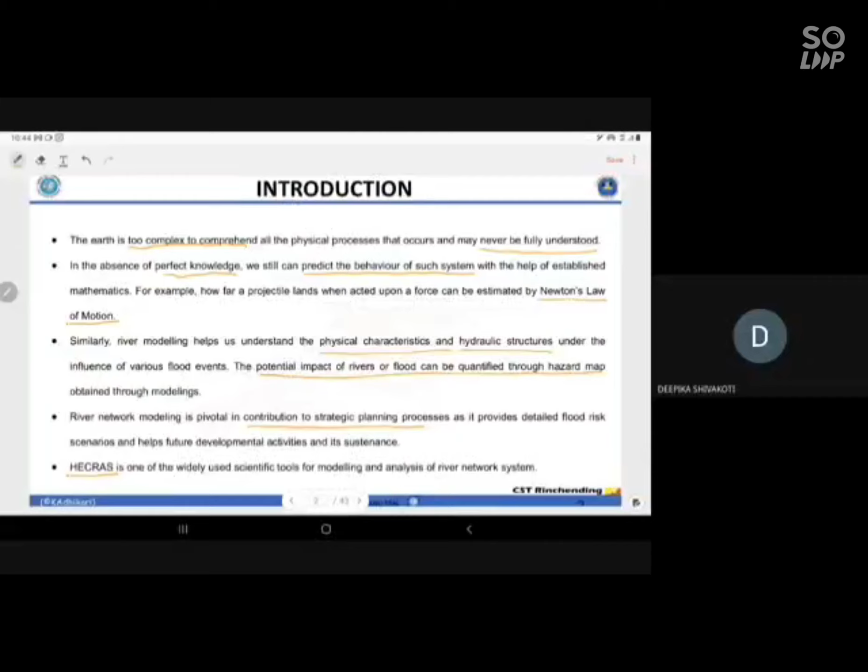Okay, so that is the basic introduction to why we do flood modeling. By the way, let me also be very clear - my presentations are intended for beginners who are just starting with modeling. Those who already have experience with HEC-RAS modeling will find this very rudimentary and basic. But I believe it is for those who are just starting, and I believe you'll have a lot to take from this presentation.

Okay, now let's understand this flood modeling much more in detail. So number one, you need to identify your study area. From the look, you can see that our world is very complex. From this small portion of Earth, I would like to say that our world is very, very complex, and to do modeling using this complex environment, complex geometry, and complex nature of topography.

It becomes slightly impossible for us to take into consideration all the factors. So what we do is we simplify things. We simplify things, because this is a three-dimensional world.

This is a three-dimensional world. Now to simplify this, we just take it as two-dimensional data. We do cross-sections, measuring exactly 90 degrees to the river, and then we take out something like this, cross sections. You can see this is a cross section.

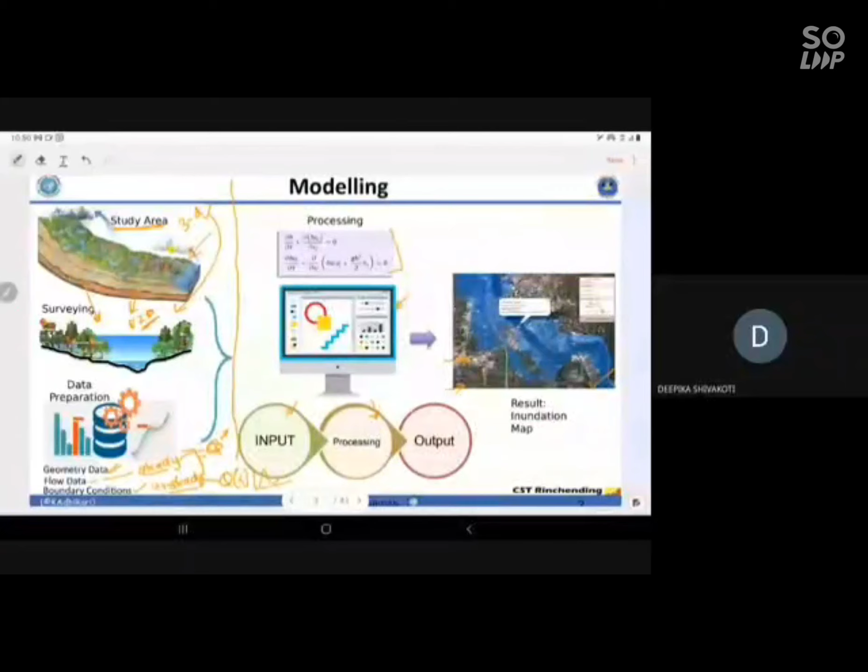Two-dimensional processing, I'll come to this point later on. The processing concept of one-dimensional and two-dimensional is slightly different. By three-dimensional and two-dimensional here, I mean that the three-dimensional Earth is simplified into two-dimensional just by taking only the cross-section at a regular interval. That is what I mean.

After that, you should have data, the flow data. The flow data can be steady data or unsteady data. If you're interested just in the surface profile, one data point, one QP or discharge data, is more than sufficient.

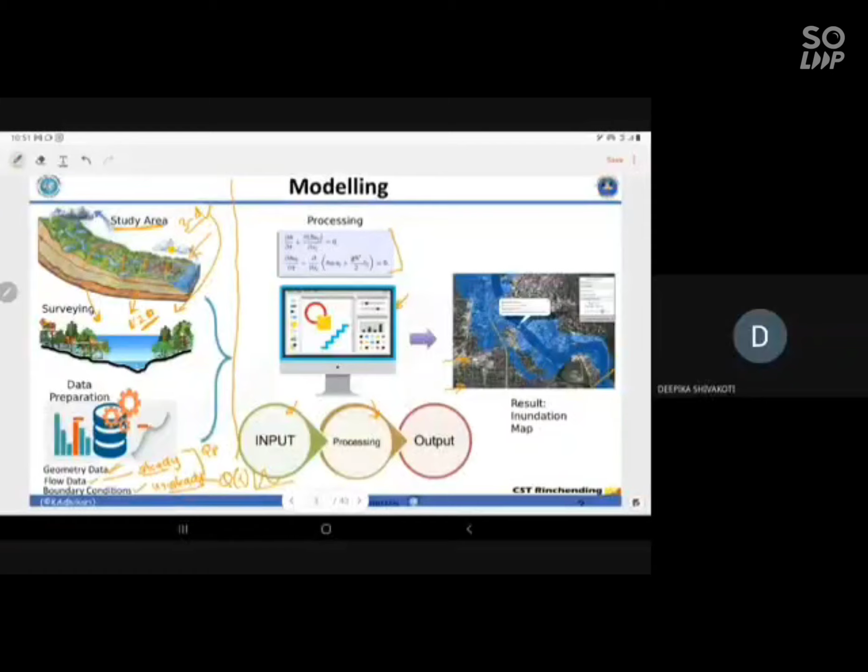If not, you should have discharge data that varies with time, which we normally call a hydrograph.

Now comes the question of why we need to do the modeling. As I already explained with this image, you can see it has already flooded. Our understanding is if, before this development happened, this river was modeled and the behavior of the system was identified, this would have never happened. That's the concept I'm saying. This could have been avoided with proper planning.

Proper planning means, before any development activity happens for any area or region, we can simply take this river, make some cross sections of it, and do a simple flood modeling. So we know that when the peak discharge Qmax, let's say X meter cube per second, is passing through, how would this area look?

Now, of course, it may not be 100% accurate, but it will give us an understanding of what the flood level would be, and how this area would behave when this flood is coming. Keeping that as a basis, we could have constructed levees or other structures that could have protected this land. So that is why we do modeling.

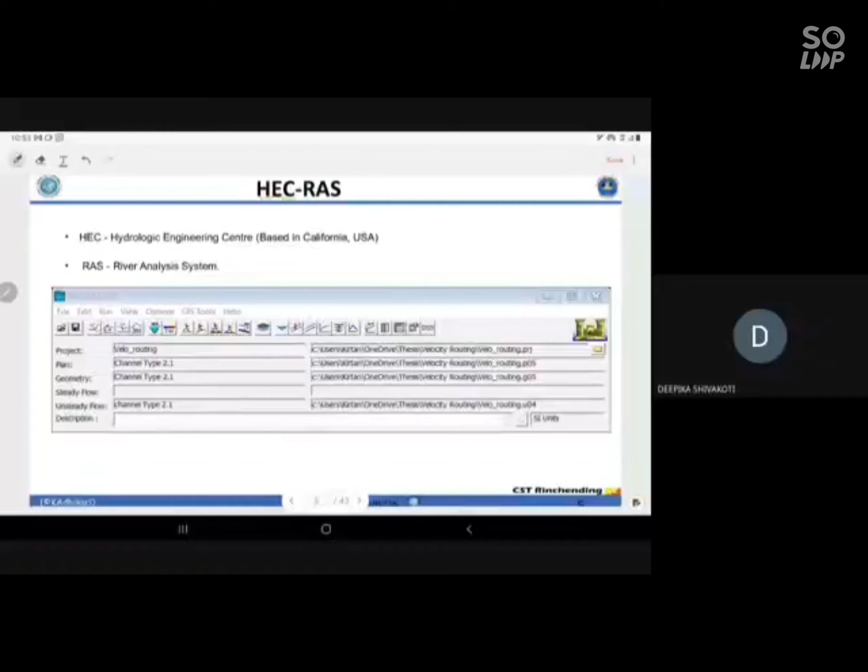So having that much understanding of HEC-RAS, let's go into the actual HEC-RAS software. When you first open HEC-RAS, you will see a window something like this. Here HEC means the Hydrologic Engineering Center, based in California, and RAS is the River Analysis System. When you open it for the first time, it's a very useful, user-friendly tool.

When you open it, a small window pops up, and there are a few options like Edit, Run, and View. These are the most important options. For most cases, you will only be using these three options.

If you need to put geometry data, you just click on the geometry editor and start putting your geometry data. First you create a project, and the plan means that for one particular geometry, you can run a number of situations. For the same case, let's take this case.

Once you have the geometry and want to supply the boundary condition X as X meter cube per second, you run with X meter cube per second. If you're not satisfied, you run again with X plus 1 meter cube per second. So you can simulate a number of times.

For that reason, there is a plan. Plan means what situation you are running. If you're running a different setup, you can name a plan. With the same geometry and the same boundary condition, but by changing the inflow characteristics, you can run a number of times.

So once you have set up your HEC-RAS model, once your geometry is fixed, and once all the other stuff is fixed, you can run the same model a number of times for different situations. So that is what plan means.

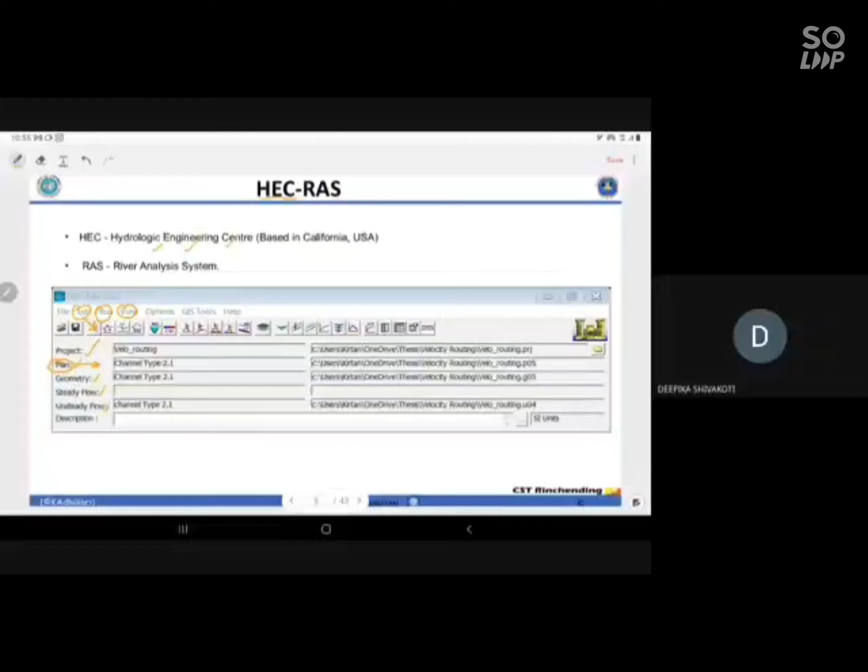Geometry is, like I said, the geometry of the entire cross section or the entire reach. There are two options—either you can run for steady flow or unsteady flow. It's very straightforward, not cumbersome at all. Anybody starting with HEC-RAS can get along with it in a very short period of time.

So let's talk about the input data now. The most important data is the geometric data—this means the entire river system and the cross sections. One convention HEC-RAS uses is: if the river is flowing in this direction, you stand here and look toward the flowing direction. Your right hand side is the right bank, and your left hand side is the left bank.

Okay, so let's say this is the river center line. So this is your right of bank and this is your left of bank. This is the sign convention for HEC-RAS. So while you put the data, you have to make sure that the Mannings coefficient for left hand side and for right hand side, you put it differently.

There's a flexibility to give different Mannings for different reach lengths. Now if I just make a cross section here, let's say this is a cross section and this is your floodplain. Here the Mannings would be different than the Mannings here. So HEC-RAS also gives a facility to give different Mannings values at different regions.

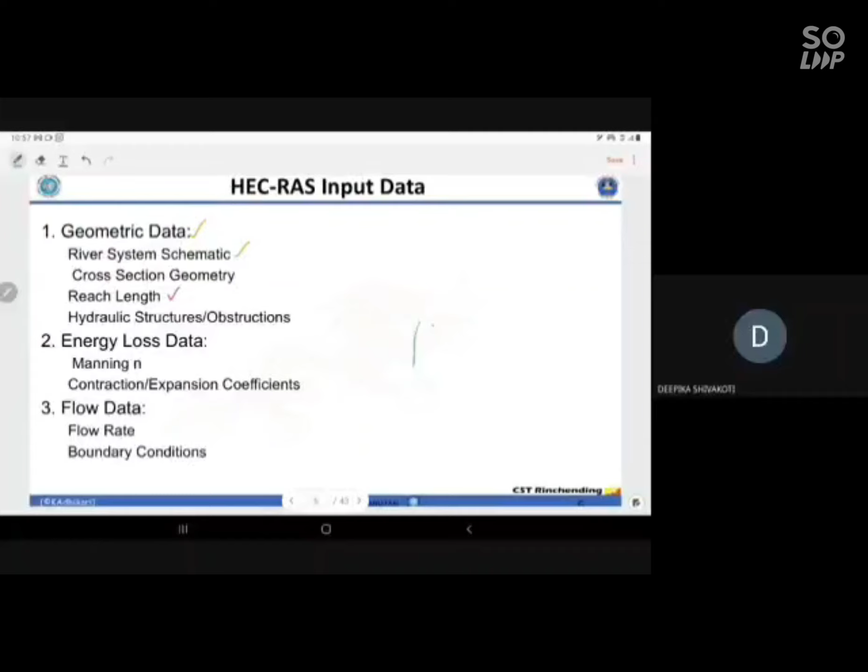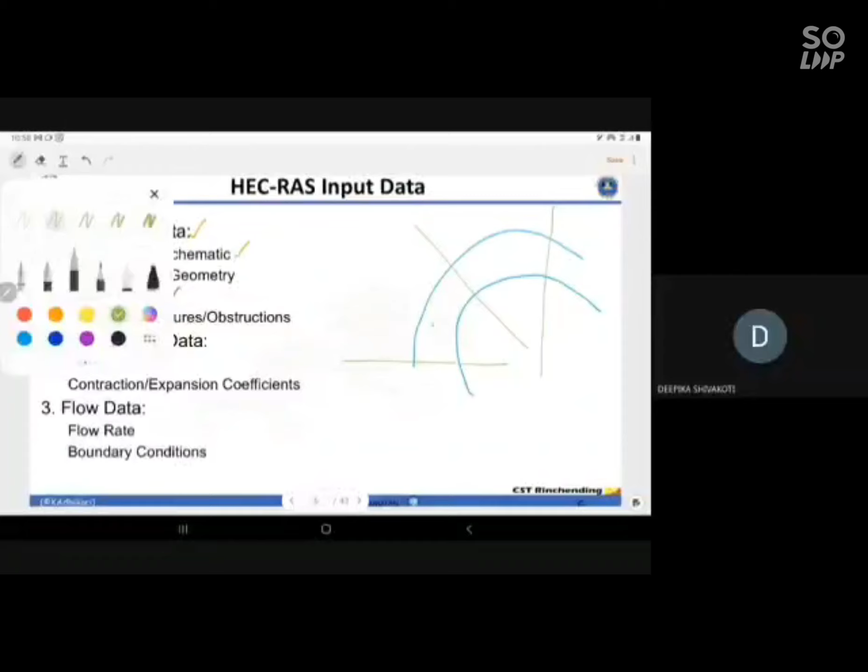Let me use a different pen here. If your river is going something like this and your cross sections are like this, it has to be perpendicular to the flow. So you see the reach length here, for the same reach, the reach length at this side is small. So for this reason, the reach length has to be different.

HEC-RAS gives you a flexibility to provide different reach length, because when the river is curving, the reach length is different. So HEC-RAS gives you a facility to provide different reach length at different locations. For the same reach, the reach length at the left of bank and the right of bank would be different. So that's why HEC-RAS also gives you a facility to provide different reach length at the same reach.

Next is the hydraulic structures. So hydraulic structures like levee, dam, barrage, weirs. HEC-RAS also provides you an option to provide this information.

And the most important parameter is the Mannings Roughness coefficient. This is a very important parameter, but at times we try to be ignorant about this parameter. It's one of the most important, in fact. One thing is we rely completely on standards available to us through some kind of standard textbook, right? But many researchers have claimed that the Mannings behaves kind of differently.

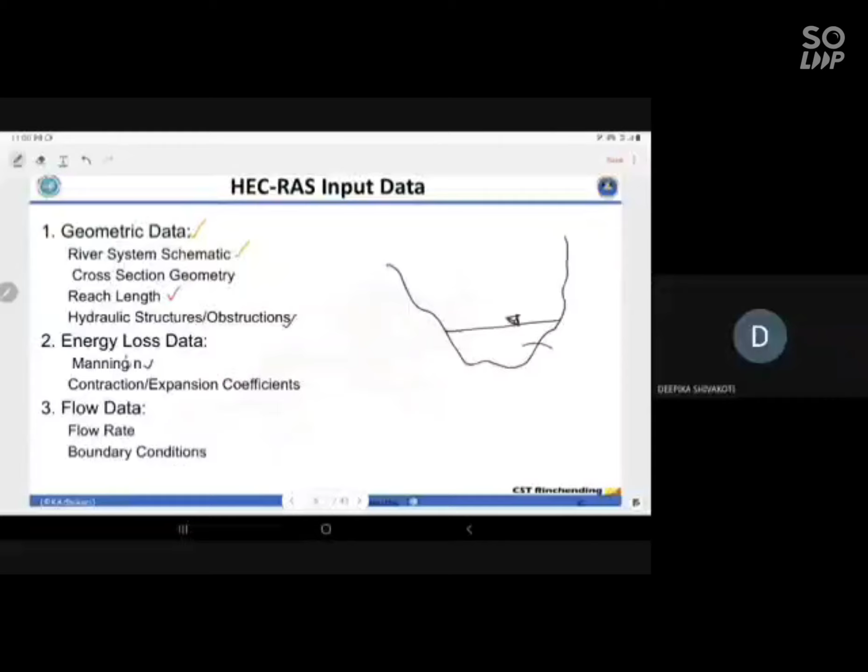Just as an example, recently I was working on this. If your cross section is like this, and for, let's say, the water depth is here, the Manning here would be something different. Let's say Manning 1. As the water level increases, the equivalent Manning, that's what we call it, at this level would be something else. In the same river cross section, Manning varies.

Manning varies in X, in Y, and in Z, and also it varies in T, in time, because you must have observed that during summer there is lots of vegetation. During winter, that vegetation won't be there, right? So this Manning is something very important.

So I highly recommend not simply plugging in the value through some standards, but to do your own research, and research in the sense you just go to the field and try to verify the Mannings. Very important, at times ignored in most cases, but it's very, very important. The Mannings given in standards may not apply.

But one limitation of HEC-RAS is Manning can vary along X and along Y, but you cannot vary along Z and T. So this is one limitation in HEC-RAS when you do the simulation. When I say Manning varies in Z, what I mean is the Manning that varies with respect to the depth of water. Maybe in future they are going to incorporate that, I don't know, but this is one limitation.

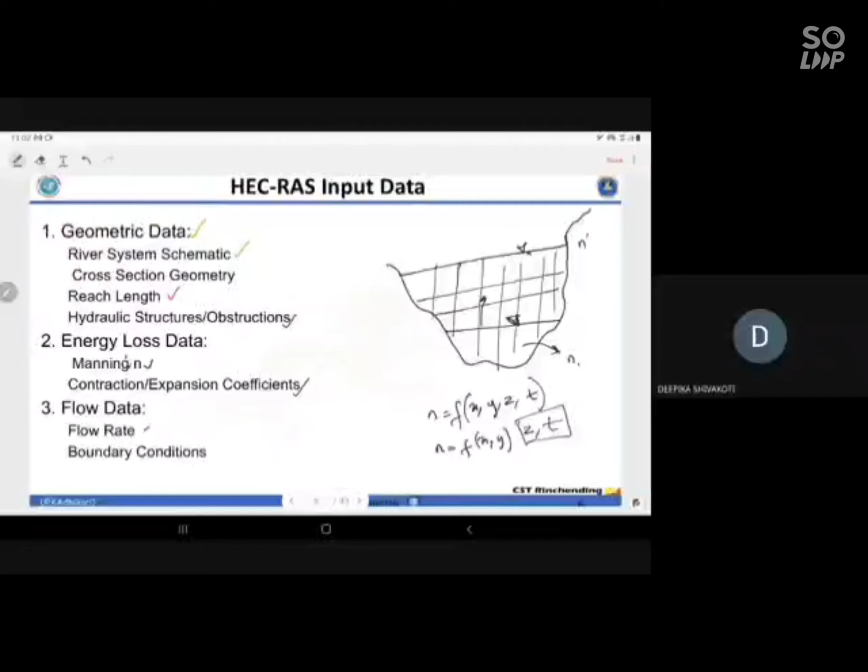You can either put one discharge value or you can put a complete hydrograph. If you put one discharge value, the scheme that HEC-RAS uses to solve the problem is different. It uses the energy equation. If you put unsteady discharge, like a hydrograph, as a boundary condition, then it is going to use the Saint-Venant equation to solve the problem. So as a researcher, you may have to decide what you are interested in - either the surface profile, or the interaction of flood with the hydraulic structures.

Okay, so let's go one by one. When I talk about the geometric data, which I have already explained, take a small, dendritic system of the catchment, wherever you are interested to model. So for instance, if you're interested to model between A and B, of course you can model the entire reach, but you need a very strong computer to process all this. Moreover, you need data sets, and this data set limitation can impose a constraint on doing the entire catchment study. So for that reason, we just take a small study area of length L, let's say A and B. Now, the same thing is done in HEC-RAS in this fashion.

Now, you may think this comes up time and again - whenever I give this lecture, the one thing students always ask is, sir, your river is meandering, but when you draw it in HEC-RAS, why are you drawing it straight? That question is always there. My students always ask this. So I know some of you doing this for the first time may have the same doubt.

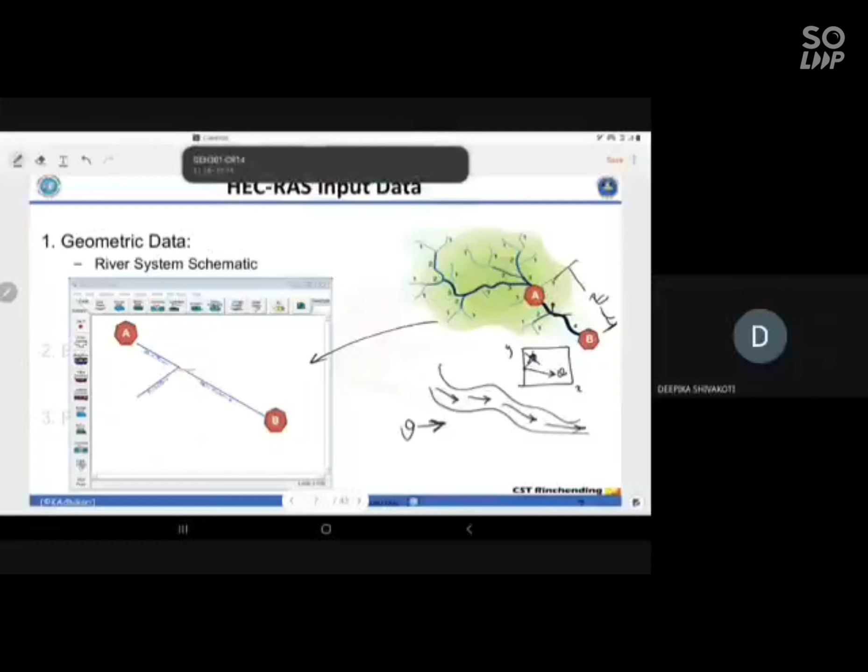The reason is it does not matter to HEC-RAS, because we are using one-dimensional flow, one-dimensional equations to solve our problem. In one-dimensional equations, we consider the velocity component only in the forward direction, so it does not matter here. The only difference is that the velocity component has an X direction, and if we take this as an XY plane, the velocity will have a component here too. But because we are using one-dimensional analysis, HEC-RAS will ignore that and only take the component in the flow direction, not the other direction along the flow. So HEC-RAS ignores all other components and only takes this velocity component. That's why it doesn't really matter whether you draw the river in a zigzag fashion or as a straight line - it's all the same.

The only difference you can provide is through the help of a reach length. If your river is meandering, and you know at which section it is meandering, from your data you will have L and L-dash with different values, because whenever there is meandering, one side will be less and another side will be more. That is the only information you can put in HEC-RAS. Otherwise, when you construct the geometry, you have to construct this yourself in one-dimensional flow. So when you construct it, you can simply click one point, click another point, and it will make a river - that is a hypothetical river. Now you need to provide the cross-section information.

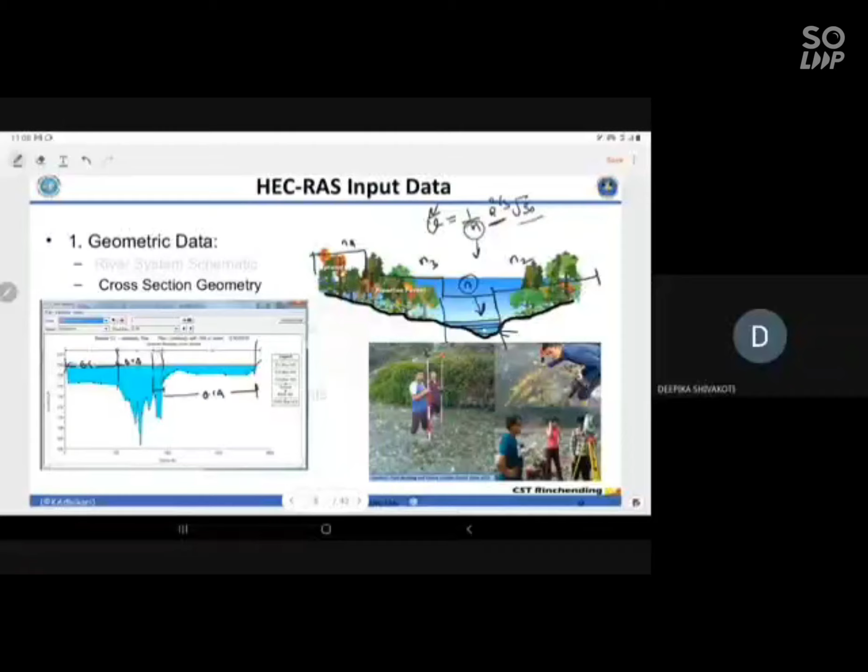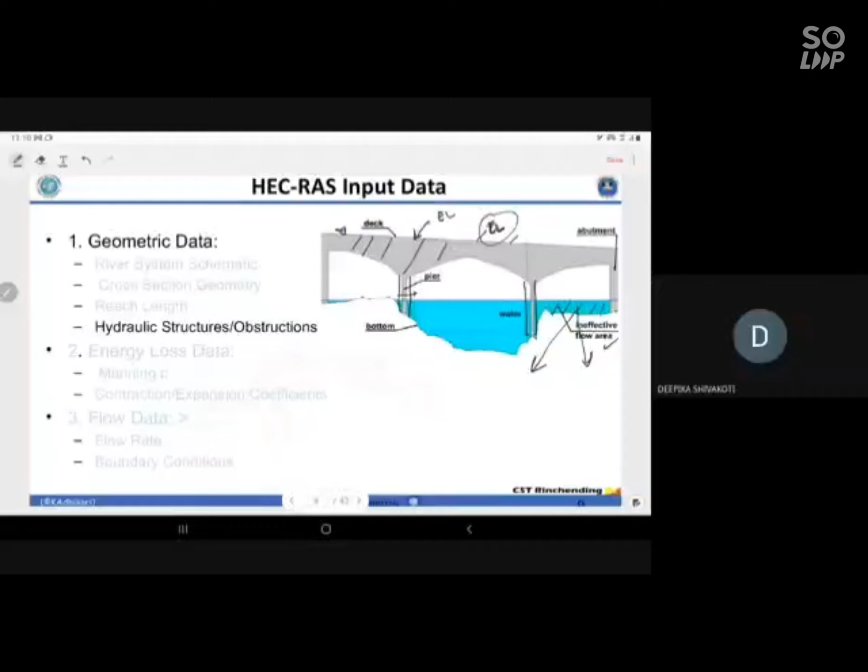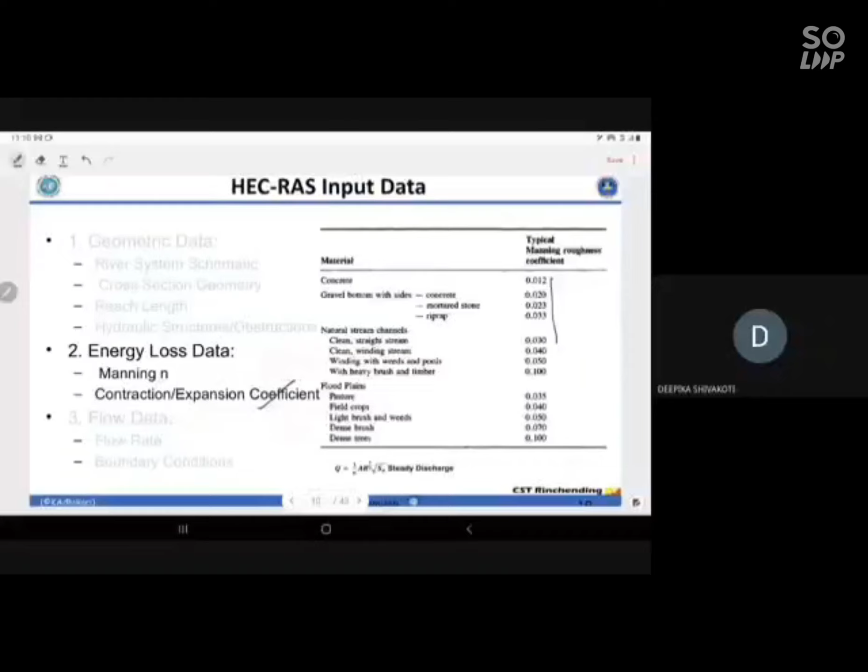I have already discussed the Manning's roughness coefficient, so let me not go in depth here, because as I said, it would be wise to go to the field and take the values yourself rather than simply relying on standard values. There's also another concept of contraction and expansion coefficients. By default, HEC-RAS gives these, but you can also change them if you want.

Finally, the flow data - the most important thing. As I already explained, you can provide one discharge value, just one Q, or you can provide a discharge with respect to time in the form of a hydrograph.

You can also provide a stage hydrograph. If you are coming from pure academics, you may not have this experience, but if you come from the field, you will understand that at the riverside, people don't measure discharge directly - they only estimate it. What they measure is the depth of flow, and once they have the depth of flow, they establish something known as a rating curve. From the rating curve, they estimate discharge.

So this discharge data is in fact coming from the rating curve. Now at times, if you don't have the rating curve but only have the stage hydrograph, you can also provide that as the boundary condition. It is not necessary that you provide discharge - you can also provide the stage hydrograph as the boundary condition. HEC-RAS has the ability to take in either a discharge hydrograph or a stage hydrograph.

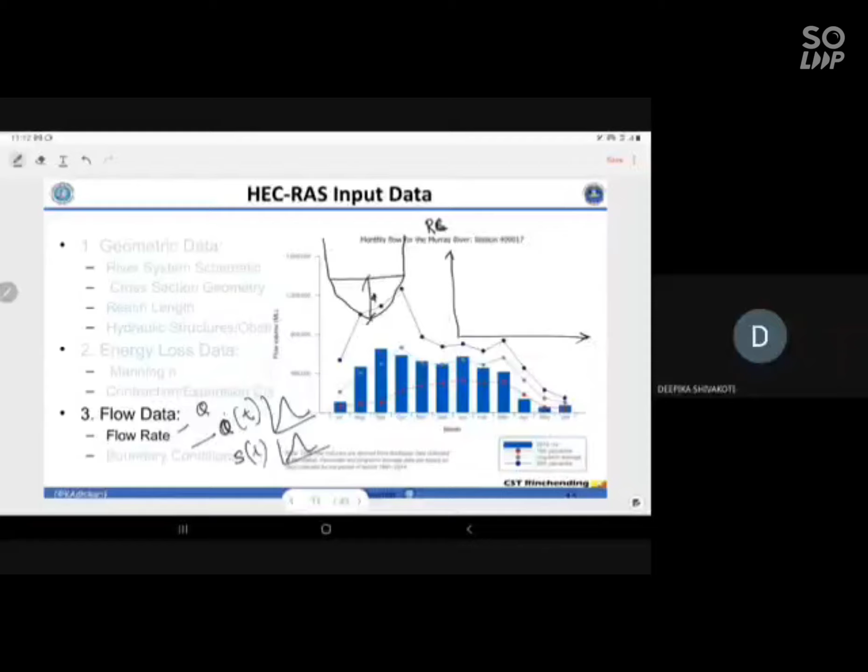Finally, we come to our boundary conditions. As I mentioned, there are two boundary conditions: one at point A and one at point B. If you forget about the tributary, there are only two boundary conditions: the upstream and the downstream boundary condition. But if there is a tributary, the inflow hydrograph also has to be provided, so that adds another boundary condition. If another river tributary comes in, you also need to provide a discharge at that point, which also acts as a boundary condition.

For this example, I have the upstream boundary condition at point A, a downstream boundary condition at point B, and since this image is cropped from the bottom, there should be one more boundary condition at point C. Otherwise, the program is not going to run.

At point A, which is the upstream boundary, I'm putting the flow hydrograph as the boundary condition. You have the option to put a stage hydrograph, flow or stage hydrograph, or a rating curve, and there are many other options. These other options are not for the channel itself, but for hydraulic structures.

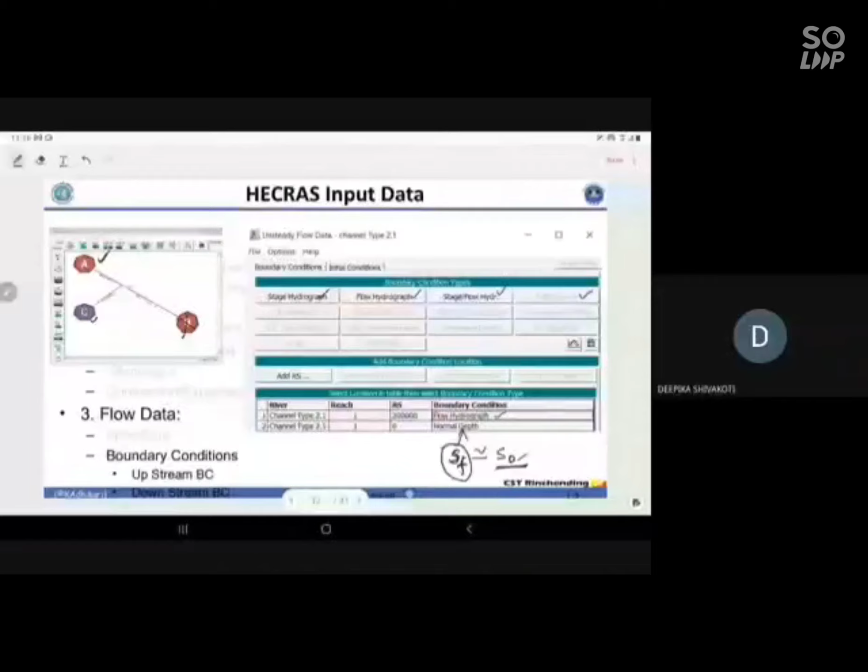So the best way to deal with this situation is to simply put S0, with the understanding that slight errors can be expected at the downstream boundary. But if you have a hydraulic structure downstream where you are certain that the flow at B is critical, then you can put critical depth as the boundary condition, and it will be fine.

Now comes the processing part. HEC-RAS has steady flow analysis, which is one-dimensional. It also has unsteady flow analysis, which is one-dimensional, and it also supports two-dimensional modeling. In today's lecture, I will be discussing steady flow analysis and one-dimensional unsteady flow. Although I have included two-dimensional flow as an example, the hydraulics of two-dimensional modeling is off the scope of this lecture, so I will not be discussing 2D hydraulics, but I will show you the results from a 2D simulation.

HEC-RAS also supports sediment transport. As a matter of fact, I have never used the sediment transport feature myself, so I will not be an expert to deliver a lecture on this, but it has the capacity to do sediment transport. Recently, they have also included debris flows and non-Newtonian flows.

I have not experimented with this very new feature in HEC-RAS 6.1. In this version, they have included debris flows, which is non-Newtonian flow.

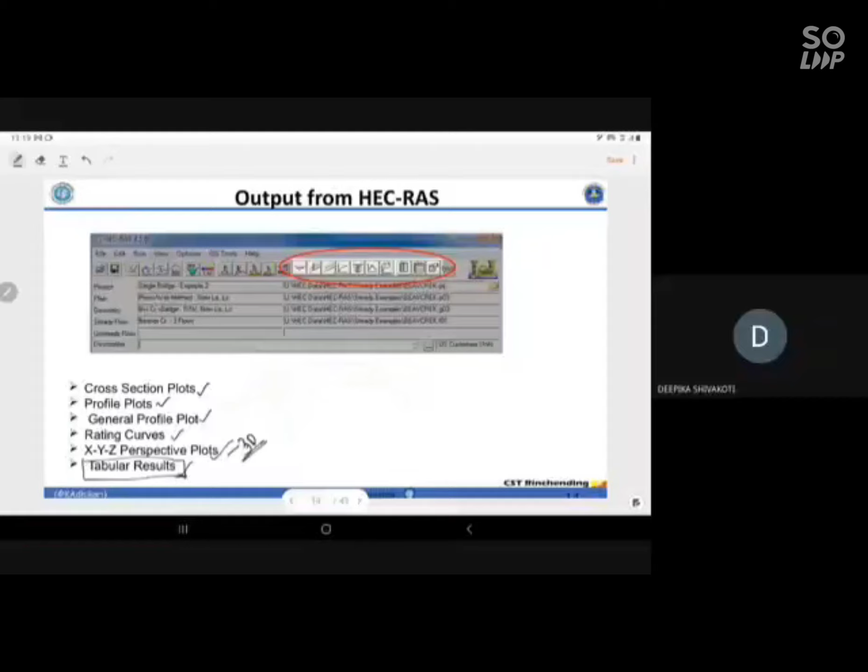If you are an engineer, then you will mostly be dealing with this tabular result. Other things are just to show, just to present, but this is more important for hydraulic engineers. So let's see what it is.

The first one is the cross-section plot. You can see this is the steady flow case. For a steady flow case, at a particular river cross-section, at that particular discharge, the water level is at this height. So it's a simple thing, just for presentation only - there is no more information available here. HEC-RAS gives you this information.

Next one is the profile plot. This is useful - you can see the backwater curves and other important aspects. If you're doing a channel design and you're not sure, because of the construction of bridges you have to constrict your channel, you want to do the analysis to see what would be the backwater curve.

So that time it becomes very useful to see how the backwater curve behaves. So profile plot is - your river is here like this, this cross section. Let me put it as profile, PP. So this cross section you are visualizing in HEC-RAS. You can see here there's some kind of dam, and from here you can see the water profile. So HEC-RAS has all these capabilities.

But as such, for my experience, this is only for visualization purpose. Mostly, if you're interested to do any further analysis, then you have to go into the tabular values, because that will give you more important information like frictional slope, the number of iterations, and the error. That is also important. Sometimes what HEC-RAS does is it's an iterative process - it uses iteration to solve the energy equation.

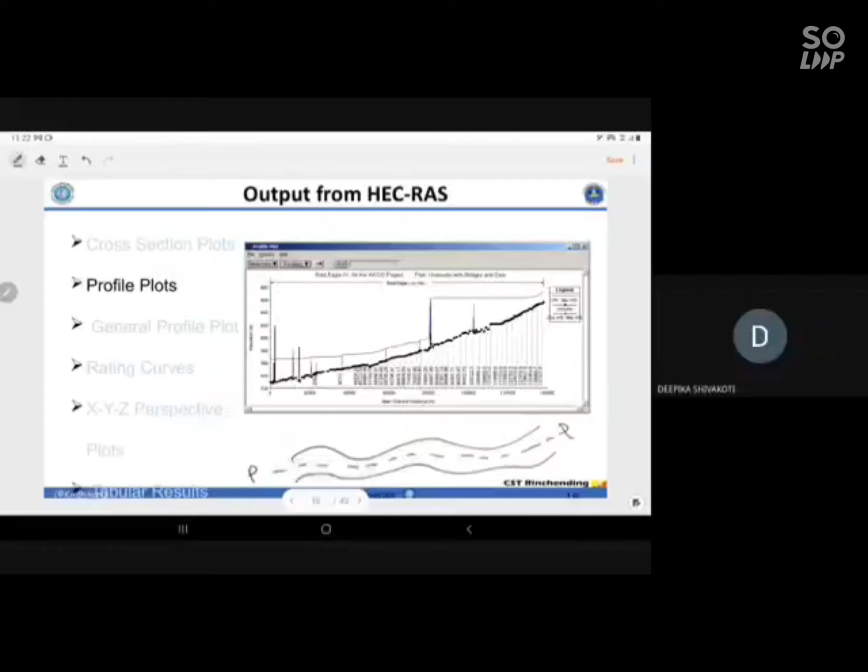And when it reaches about 20-30 iterations - I forgot the exact number, I feel it is 20 - when it strikes the 20th iteration and yet it could not converge towards the answer, then it will simply take that as a value, and HEC-RAS will give that as a warning or an error. Sometimes that happens.

So finally, HEC-RAS also gives a rating curve at a particular cross section. Now, why I'm showing this is important - from the rating curve, you can analyze whether your model was stable or not.

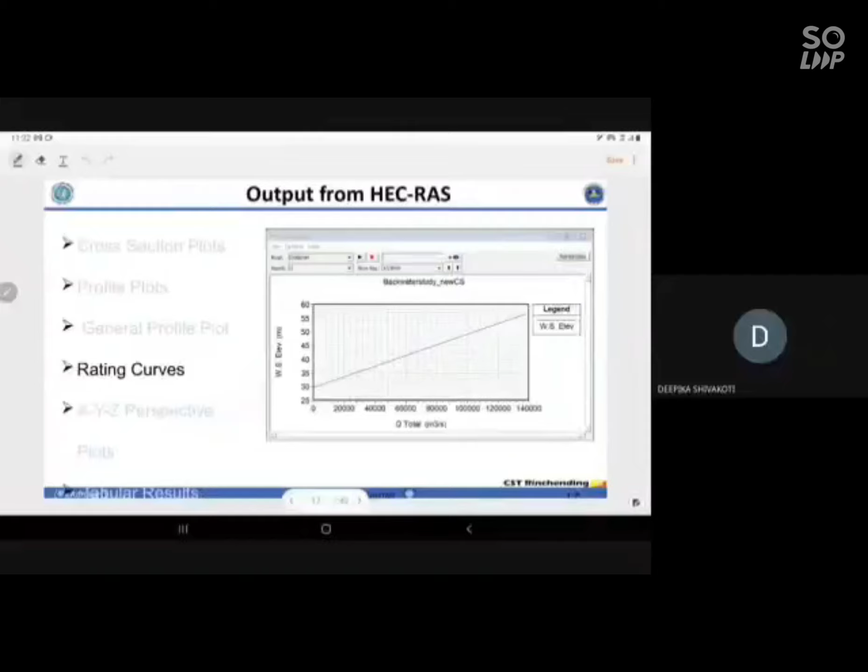Sometimes what happens is your HEC-RAS will run, it will simply run, it will give you a result, and you will be very happy. But when we analyze this rating curve, you will feel that it has gone something like this. So from here only you can make sense that although HEC-RAS did not indicate any issues, you need to understand that there was some kind of instability in the program. You may have to change some parameters in your geometry or your flow data, and then simulate the cases again. I have observed this a number of times.

HEC-RAS is running absolutely fine, but when I check the rating curve, it gives something like this. So from here you can make sense that it was not correct. Maybe it is because it has reached the 20th iteration, it could not converge, and then it took the same value.

Because of that, the error was persistent in the rating curve. So this is one way to analyze whether your program is actually working fine or not. If in unsteady case there are some issues, then the solution will blow off, meaning your program is becoming unstable. So the rating curve is one case where you can visually see whether the program has run fine or not. My first thing after doing a simulation is to go and directly check the rating curve. If it's coming fine, then of course I can rely on the data.

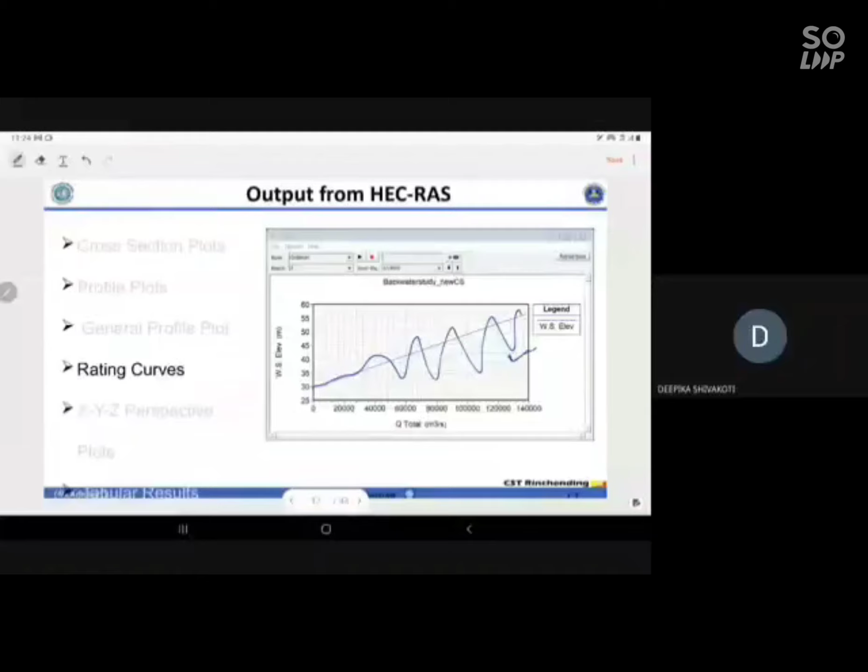If HEC-RAS is not giving any issues, yet the rating curve is fluctuating like this, then I need to once again check my input dataset. This is very important, something I have learned with experience. And finally, not very pleasing, right?

And the last and final one is the tabular plot. This is where most engineers would be investing their time. So after running - this is for a steady case - taken from the Godavari Sabari reach. We were also doing some steady analysis there, just one-dimensional analysis. So at that time I took out this tabular form of the results.

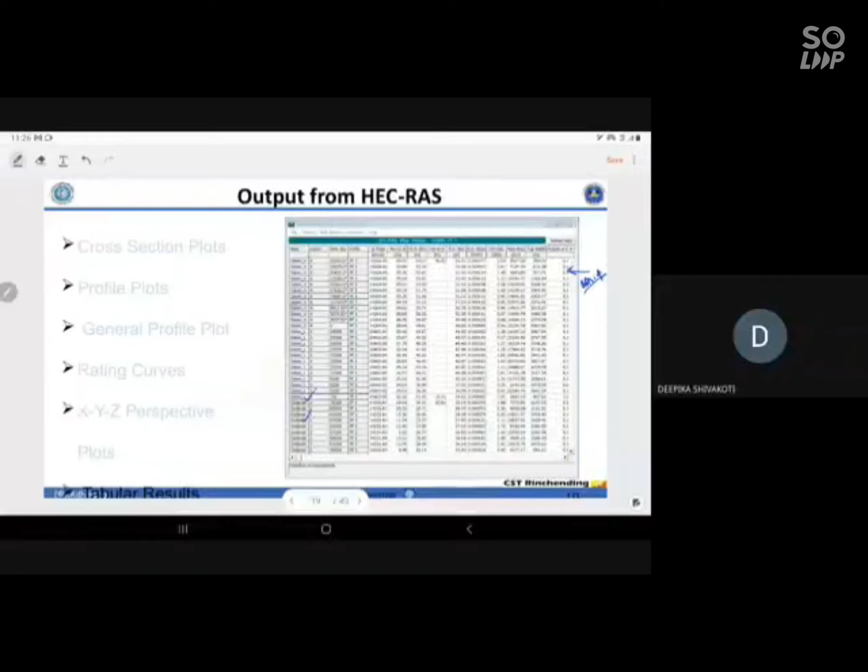HEC-RAS also gives us the flexibility to solve in the mixed mode. Mixed mode means it handles both supercritical and subcritical flow - we know there are two types, right? So mixed mode means when you're doing a simulation, it also handles the Froude number fluctuating below 1 and above 1. So there's a chance of Froude number going very high and very low in the same case. For that, if you anticipate such cases, then you can run for mixed mode.

So to summarize everything, HEC-RAS has 3 steps: input, processing, and output. In input, there are again 3 cases. First, you put the geometry data, then the boundary condition and the flow data. These are, and also the Manning's roughness - the roughness. So there are 3 input parameters.

Then you choose processing - now we have steady, 1D steady, 1D unsteady, and 2D unsteady cases. So you choose what you want to solve for. And finally, output - you can visualize the cross sections, the profile, the rating curve, and also the errors.

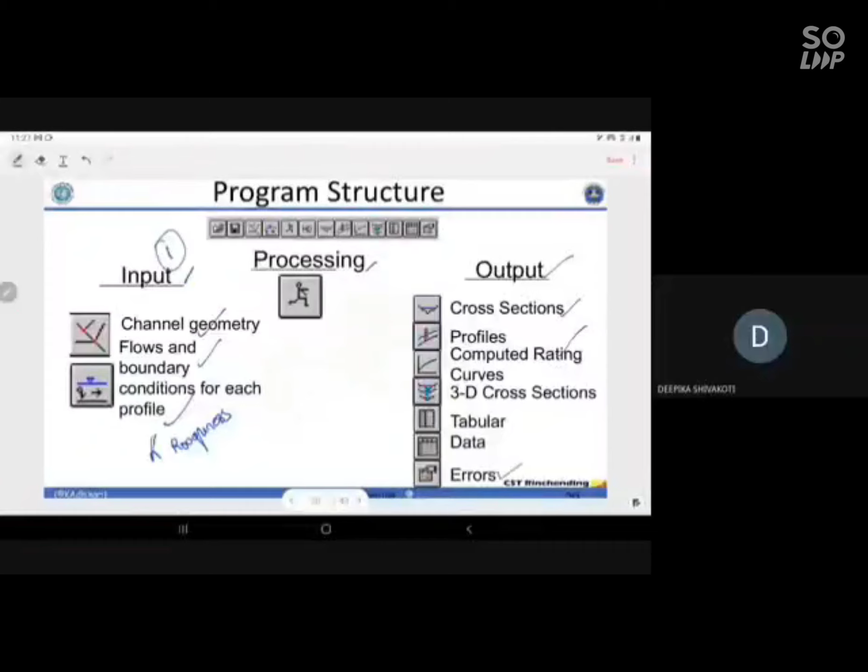For engineers, I believe the errors and the tabular data are much more important for us than the 3D cross sections. The profile, the perspective plots - that is only for presentation purposes, not very useful. But for engineers, the tabular data and errors are definitely very useful. And also the rating curve.

The rating curve check is not a standard process, but I usually check it. If it is stable, I understand the program went well. If it is not, then we need to understand that there was some problem in the simulation.

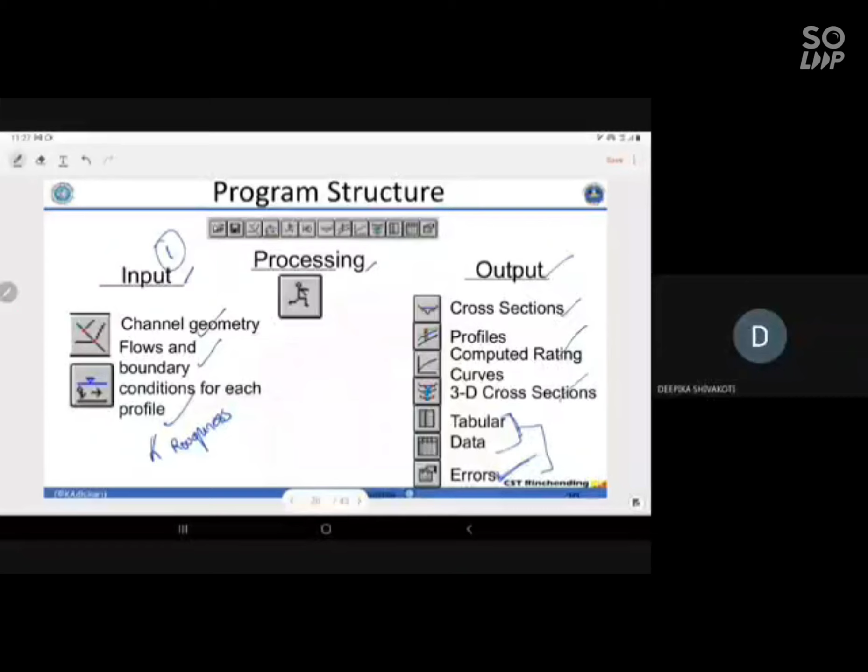So finally, to summarize everything, what did we just accomplish? We did modeling - so what exactly is modeling? Our physical world that we live in is very complex. We can simplify it by ignoring factors that are insignificant in the study.

For instance, when we put river discharge there are so many other aspects, because the density of water is not exactly 1,000 - when it's flood water, the density of flood water is not 1,000. Yet we put 1,000. These are some of the assumptions we make. Moreover, there will be evaporation, there will be infiltration.

We did not take this into consideration because it is insignificant when compared to the peak discharge. The value is very insignificant, so we simply simplify things by not considering other factors. By simplifying the system, it enables us to predict the behavior with the help of established mathematics.

In open channel flow, the mathematics is the Saint-Venant equation. There are two equations: one is the continuity equation, and one is the momentum equation. Here I have given you both forms of the momentum equation. One is in conservative form, another is non-conservative form. Non-conservative form means the variable here is in terms of depth and velocity.

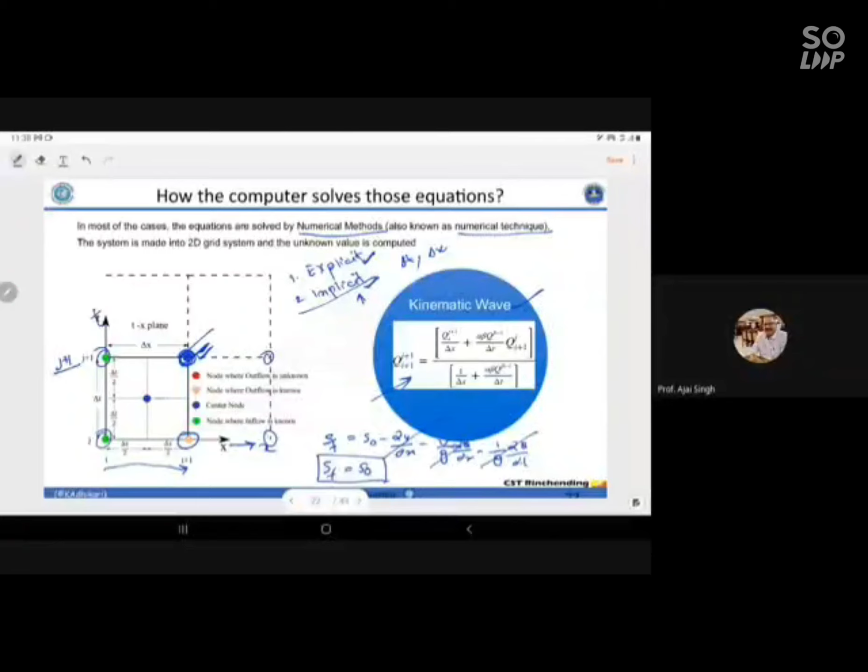Kinematic wave is fairly suitable in my case because it's a mountainous terrain, and the wave behaves much more in a kinematic fashion than in a dynamic fashion. So for the Indian case, kinematic is absolutely not to be used. That's some extra knowledge, nothing to do with HEC-RAS anyway, just extra knowledge.

All right, so finally we say we solve these equations, but how exactly is this equation solved? So just in case, for those of us who have forgotten the basics of calculus - moreover my slides are for students, so you can skip this if you're already aware of it.

So what we do is we find the derivative terms from the basic definition of derivative, that is the slope. Just as an example, let's take the function value of x squared, and we want to estimate the slope, keeping the x grid as the distance of the small change, delta x, as 0.2. From this equation we get to know that the derivative of this function at the value of 3 is 6.2.

Analytically, if we solve it, we know that the derivative of x squared is 2x. By this, we get the function value 6. So we know now there is some issue here, right? In numerical technique, this issue is what we call truncation error. If you subtract the actual value minus this value, there is some overestimation.

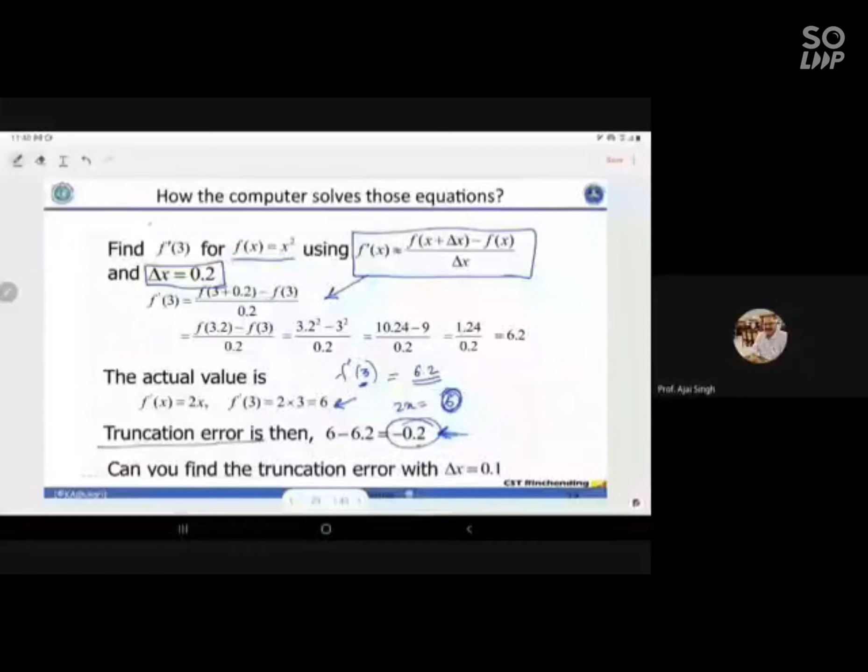This could be a reason, I cannot tell for sure, but yes, when we are doing so many approximations, such errors are persistent in the model. This is not just true for HEC-RAS, it is true for any numerical technique. To reduce this, people have used different forms of schemes to solve the equation numerically. So finally, here comes the most important thing: how reliable are these models?

I see some errors in previous examples, so there are some errors, right? So that is what I was referring to.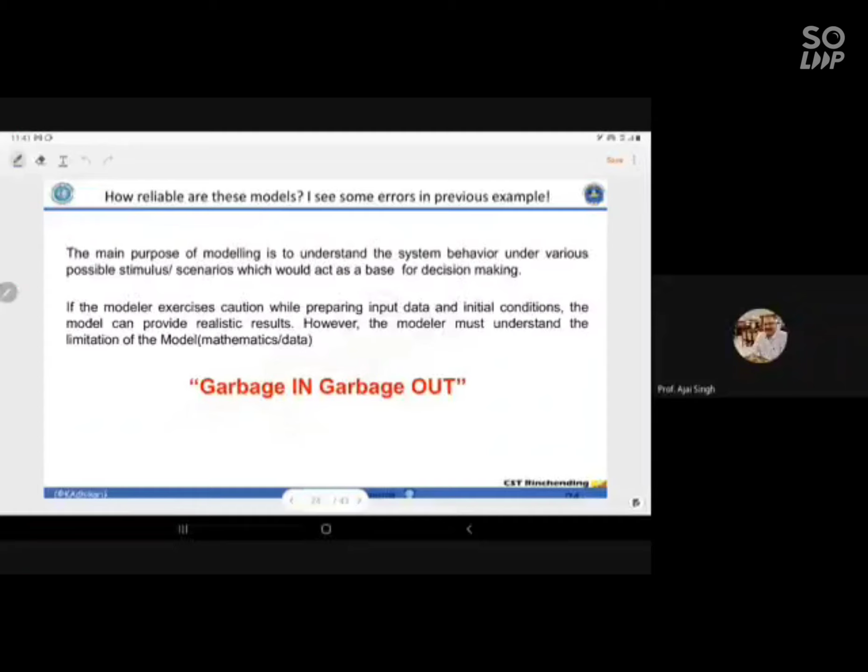The purpose of modeling is to understand the system behavior under various possible stimulus that would help for decision making. That is the main fundamental idea behind all this modeling. We don't want to exactly find the solution, but it should give us something based on which we can plan and make decisions. If the modeler, like you and me, exercises caution while preparing input data and initial conditions, the model can provide realistic results.

What I mean to say is, if our numerical technique is very stable, if the input data is correct, if the Manning's roughness that you have used is absolutely fine and correct, then yes, the result that a model generates is realistic and we can believe in it.

However, the modeler must understand the limitations of the model and the mathematics. Like in my previous case, I'm using kinematic. Although if you run kinematic, it will simply run and give you some values, but kinematic for India is not a suitable choice. There is a limitation there. So these limitations one has to understand.

And finally, I would like to emphasize with red and bold: garbage in, garbage out. That is true for software, any modeling. If you put some garbage values into a software, the software will give you garbage back. So this is something that we all must understand about modeling. We don't say it is 100% accurate, but at the same time it should not be 100% wrong, right? So this is what we need to understand of modeling.

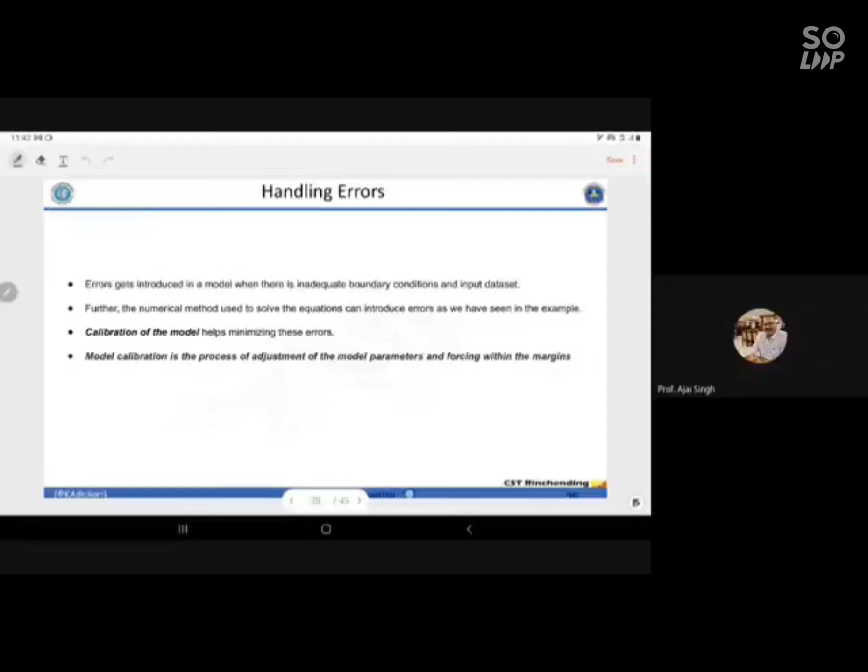Now, handling errors. So we know that there are some issues, we have made so many approximations. So how we can deal with these issues, particularly in HEC-RAS, the error gets introduced when we have inadequate boundary conditions and input data set.

Like I said, the downstream boundary condition, because HEC-RAS uses the implicit method, it requires a downstream boundary condition. By default, HEC-RAS will ask you the frictional slope, which of course nobody will have at the downstream boundary condition. So that time we put S naught, the bed slope, as the boundary condition.

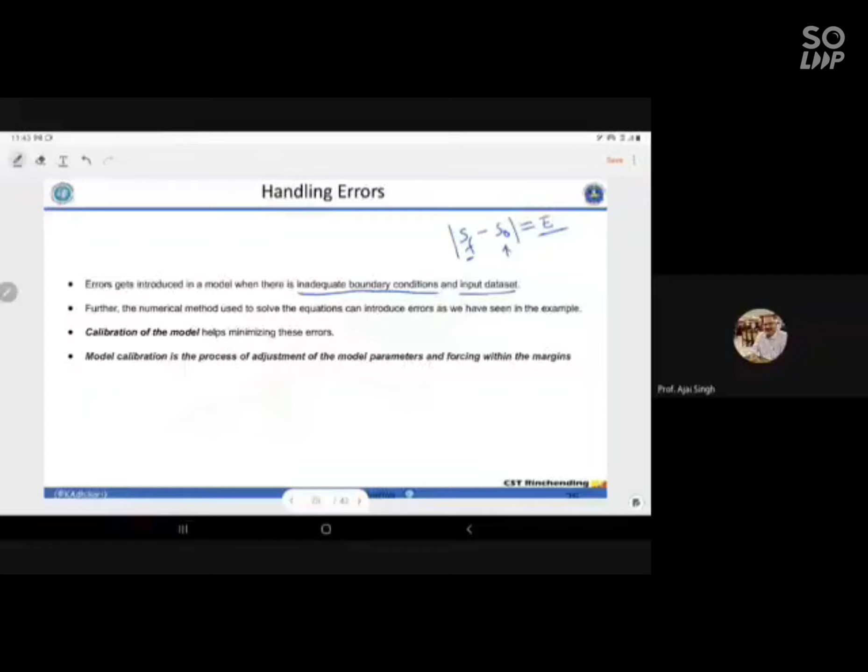Now, what would be the difference between SF minus S naught? Whatever value comes, that will act as an error. In a simple sense, that is an error, right? Because SF is what we need to put, but what we are giving is S naught. So whatever error is coming here, that will act as an error in our result. This is something that we need to understand.

Further, the numerical method used to solve the equation can introduce errors. Like in the previous example, we have seen the numerical technique that we adopt can also potentially introduce errors.

So next comes how to minimize this, which is model calibration. Model calibration means you should have a particular data set whereby you have the input and you also have the output. Now, what I mean by output is somebody should have a measured discharge at that reach. When you provide certain input, you should have certain output.

Let's say for normal cases, if you just impinge a normal discharge of some normal Q, then if you have the output value, based on this you can calibrate your model. Calibrate your model means tweaking some parameters such that your solution is much closer to the output, that is the observed value. Usually this is difficult for flood modeling, but for rainfall runoff modeling, this is one of the most important steps in modeling.

For flood modeling, however, because flood modeling itself means we are generating for flood, we may not even have this output. Although I said if you have it, it's very difficult, especially in a developing country, to have it—it doesn't really work because we don't have it. So there comes the main issue, and for flood modeling this becomes a major issue, because we cannot calibrate, we may not have the observed data. So that is one issue.

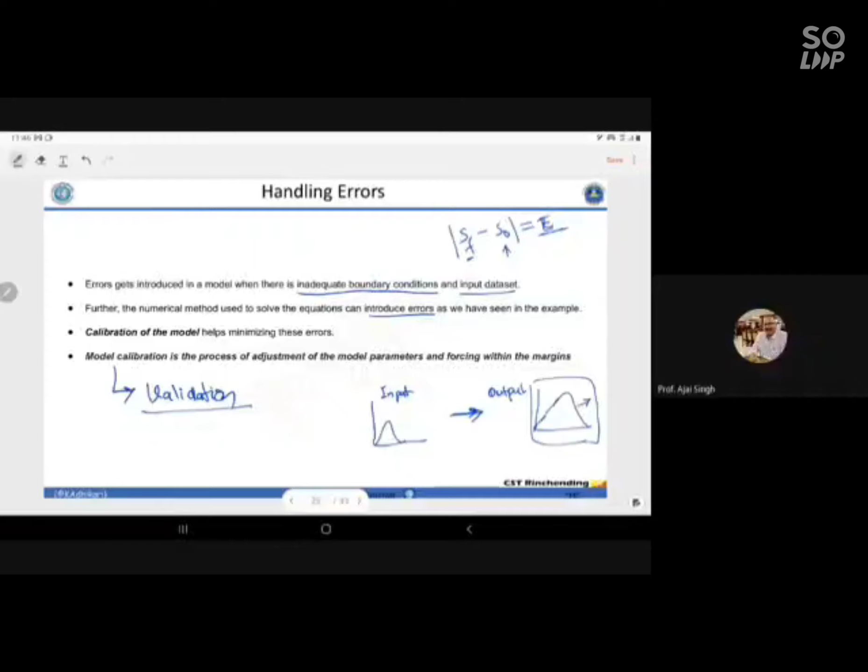Now validation, usually for rainfall runoff modeling, we do this validation. You take a complete time series, let's say for 1 year, and use that as a calibration period. You use that data to tweak some parameters so that your result is very close to the actual output. Then you choose another year, like 2018 or 2017, and test your calibrated model on that validation period. This gives you an understanding of how well your model is actually working. This comes in rainfall runoff modeling, and it's one of the most important things.

But for hydraulics modeling, validation becomes a challenge, because we can do it in an approximate manner, but validating the actual results may impose a lot of challenges. That's why I say it should be taken as a guiding principle rather than exact. It's not going to give us the exact answer.

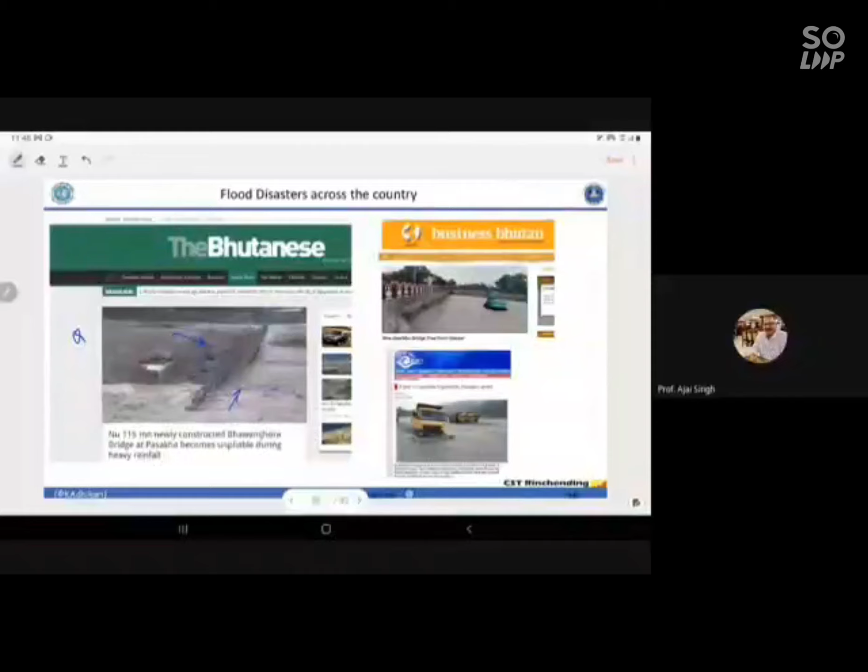So here comes the judgment of a modeler, the person doing the modeling. If you simply use discharge, say 10 meter cube per second, to set up your hydraulic model and run it, the result is completely different from what is observed in the real world. As a researcher, we also need to identify the problem well. Just because you have software that can calculate discharge, don't simply dump that discharge into a model and run it. You need to identify the problem first. Identification of the problem is more important than trying to do the simulation.

So that is what I feel. It's completely an ignorance from the hydraulic side. The structural engineer must have done all the nitty-gritty calculations needed to construct the bridge, but on the other side, the hydraulics of the region was completely ignored. That's why this is a newly constructed bridge, not an old one. People were aware of the situation there, yet they completely ignored the hydraulics and ended up in this situation.

Last time I visited this area, a little bit of this bridge was visible again. They have started digging this, and now the top portion is a little bit visible. Another case is there's a bridge. From this image you can tell that the depth of water is very less, because the chain of the excavator is completely visible. So the depth is not much here, right?

When this bridge was constructed, they kept nearly 5 meters of clearance. The water was flowing 5 meters below this bridge when it was constructed. But in just one flood, there was a deposition of 5 meters. So this is another case where simply using a discharge value while modeling may not give realistic results, because here the sedimentation is completely ignored. You can see this bridge was nearly washed away just like this.

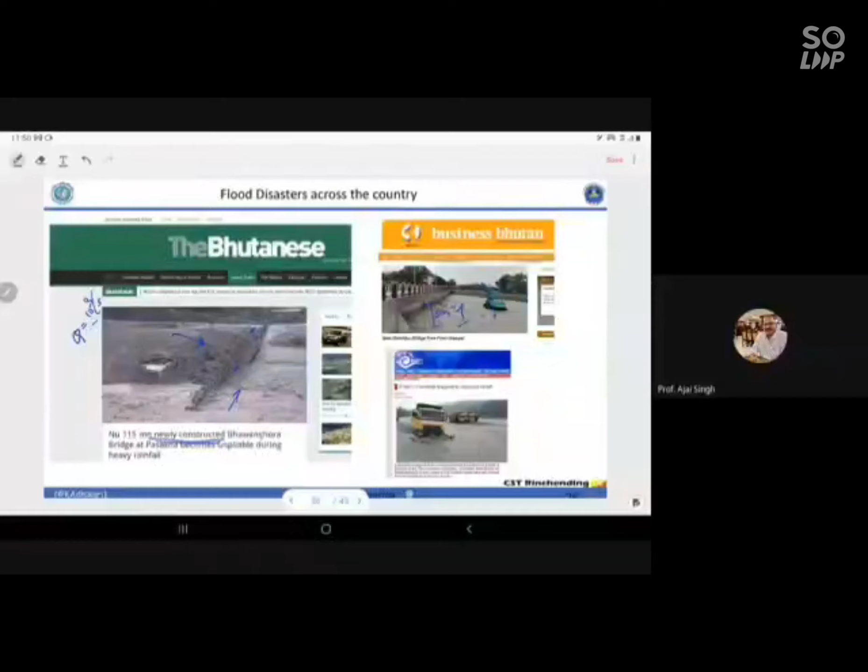So people intervened and used excavators to dredge out the sediments. Later on, right now the depth, if I go there, is about 5 to 7 meters. I don't know for how long it will be there, but I still feel this is also an ignorance of the hydraulics of the region.

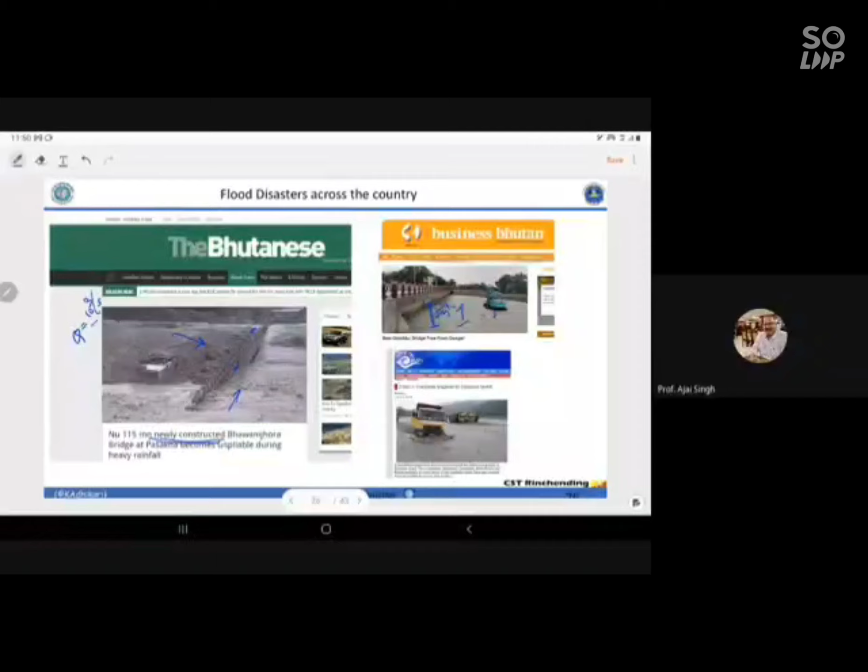There are so many such situations. If you just browse along, not just in Bhutan, recently a bridge has collapsed in Nepal. Maybe there's an ignorance from the construction side, or it could be an ignorance from the hydraulic side, I don't know for sure. But of course, using a model setup can pretty much give us an understanding of how the system would behave under different stimulus. These are some of the images nearby.

So to summarize my talk, disasters cannot be avoided completely, but we can do a lot to predict their occurrence through modeling and prepare disaster plans before that happens. Modeling can help us prepare hazard maps, and it can act as a baseline for policy making.

So that is the main reason of doing flood modeling, at least for flood modeling.

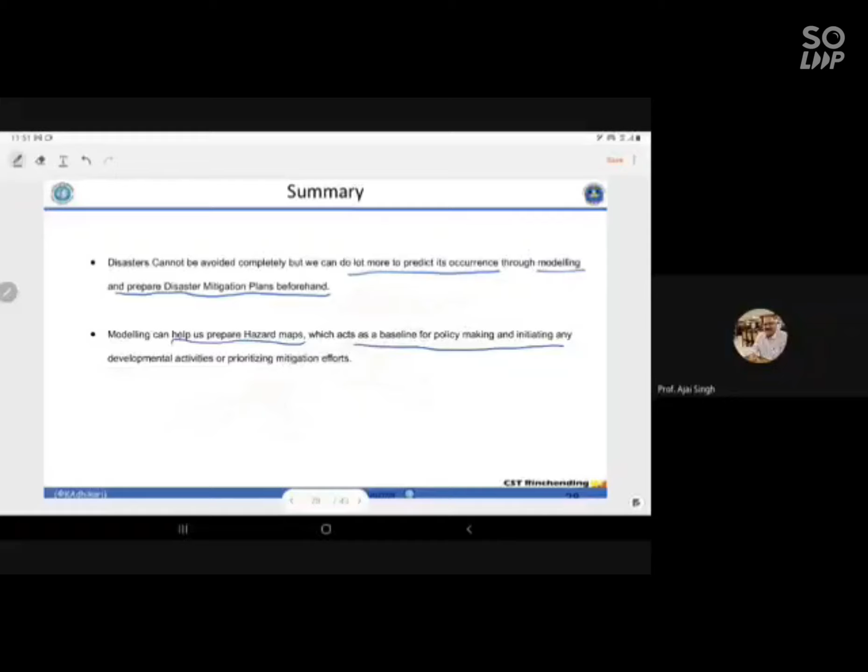So when I'm on this disaster topic, let me also introduce you to the Center for Disaster Risk Reduction and Community Development Study at College of Science and Technology. This is a very newly established center. Our vision is to become the Center for Excellence in Research in Disaster Risk Reduction and Community Development Studies. It's a very new center, and I see a lot of opportunities to collaborate with universities like yours, the Central University of Jharkhand, and many other universities.

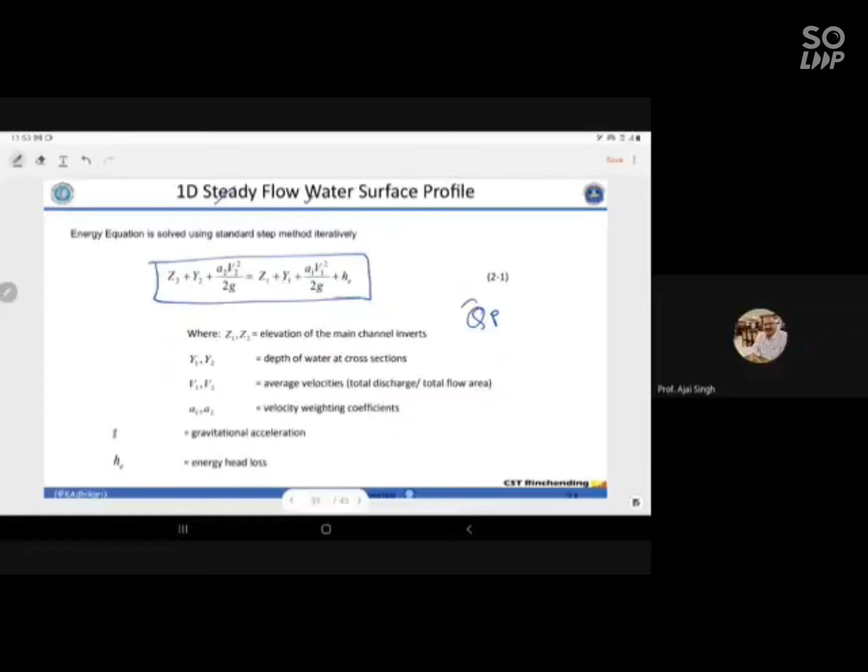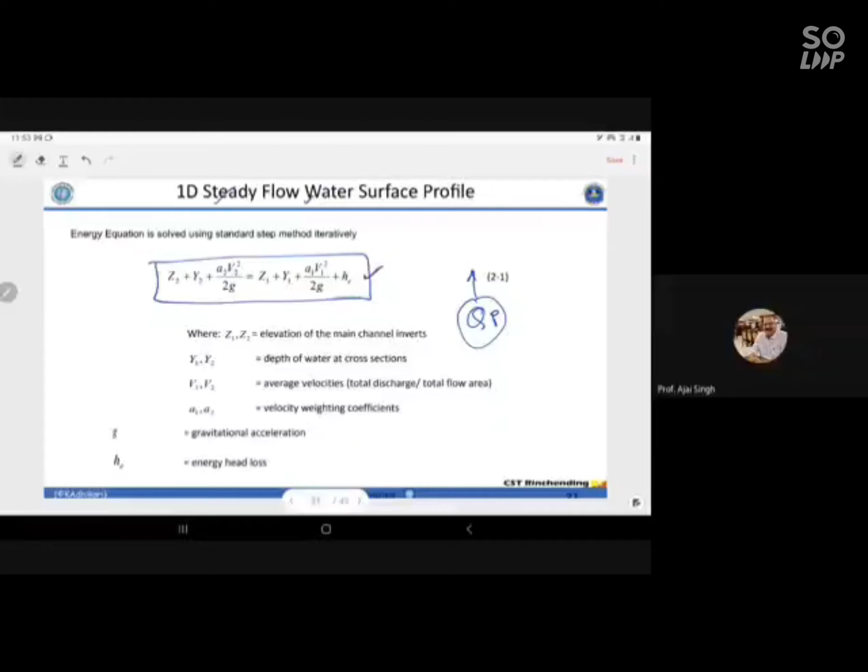This equation is solved iteratively when you use 1D steady flow. 1D steady flow means you will only put Q or one Q value, not the time series, but just the Q value. If you put that in your HEC-RAS as a boundary condition, that is what is known as the steady case. So if you do that, HEC-RAS will use this equation, not the Saint Venant equation, not the shallow water equation. It will use this equation to solve for the depth and the profile. So this is the setup. I believe we all know this.

Now one limitation, as per the HEC-RAS manual, is: let's say this is the channel bottom, just a plane. The limitation is that the depth we are interested in or normally measure is this depth, and HEC-RAS uses this depth - the depth we put in. But HEC-RAS actually uses this depth d cos theta for calculation, where theta is the slope angle. So if your slope is low, then d cos theta is nearly equal to d for a very small value of theta.

For a steep slope, this is not equal. So there would be some error introduced if we use 1D for steep slope channels. This is what the HEC-RAS manual says.

Now, how exactly it solves is: the only unknown parameter here becomes HE, which needs to be approximated, and accordingly you need to find the depth. So HE, that is the frictional losses, is calculated using this equation, whereby this is the coefficient of contraction, then velocity head at upstream, velocity head at downstream, times, plus the frictional losses.

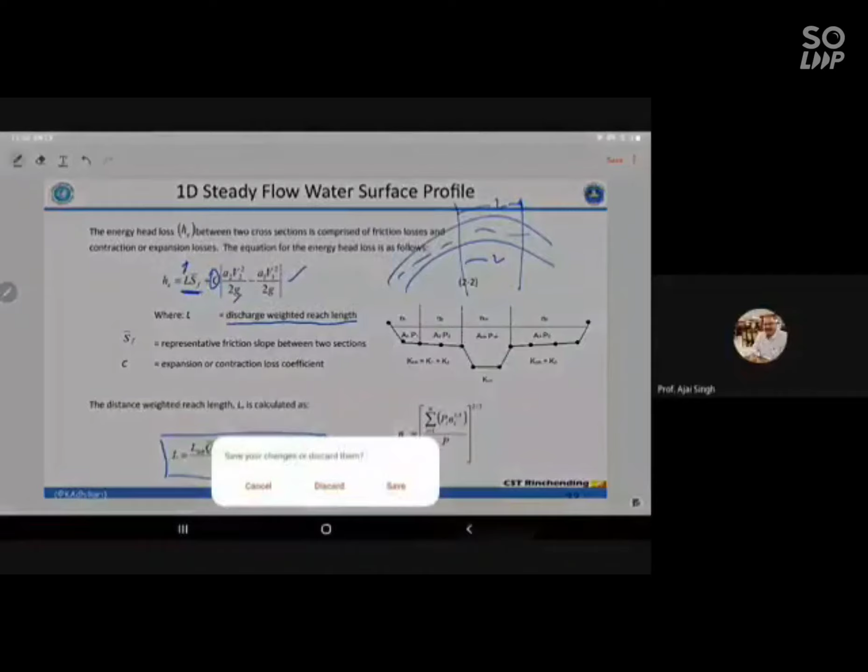Next, I said HEC-RAS has the ability to take in various Manning's values at different floodplain sections. So on the right floodplain, you can use a different Manning's value; in the channel, a different Manning's value; on the left, a different Manning's value. So now we need one Manning's roughness, which is also known as the equivalent Manning's roughness.

So the equivalent Manning's roughness is calculated by this equation - this is also known as Horton's equation. You cannot just take an arithmetic average of this, because Manning's roughness has unique dimensions, right? So this equivalent roughness is calculated using Horton's equation. There are other equations also available to find the equivalent roughness, but HEC-RAS uses Horton's.

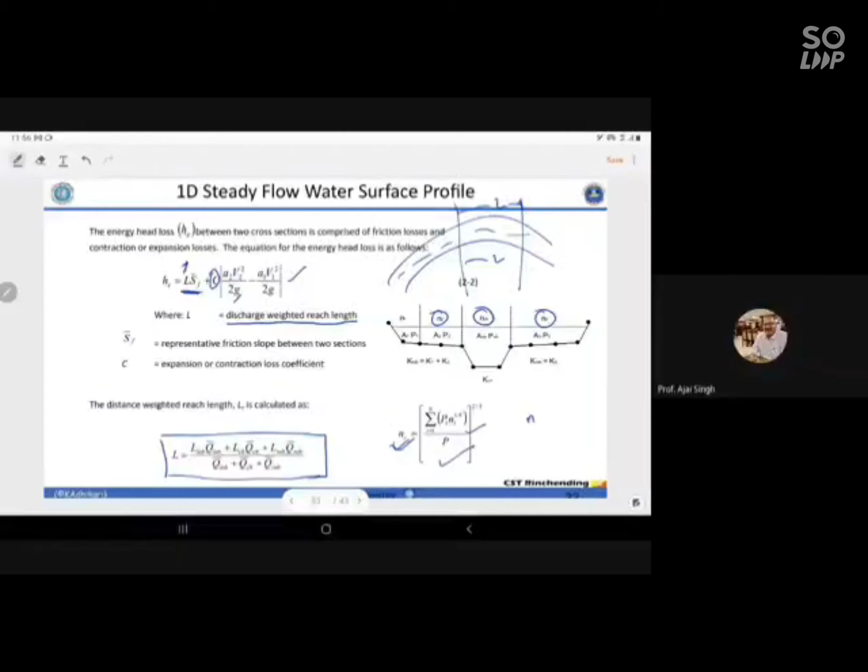And as I said, once you distribute this floodplain into right bank and left bank, there is definitely going to be a different velocity in each. For the standard step method, we have to use one velocity, that is the average velocity.

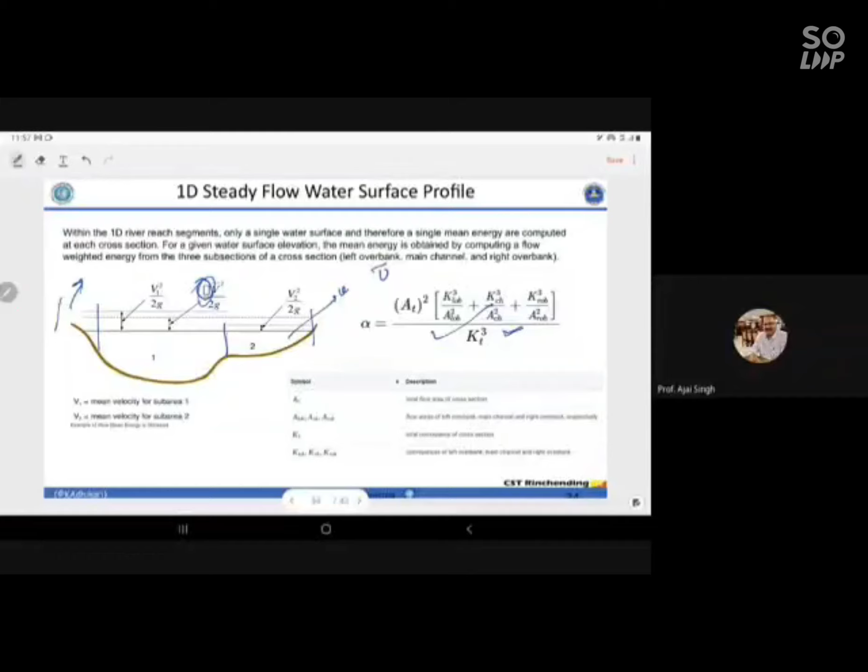To calculate average velocity, what we need to do is average the velocity, and this coefficient, the correction factor, is calculated using this equation. How they came across this equation, the entire derivation is available in the manual, which I recommend you go through before you start your HEC-RAS journey. In simpler terms, it uses the conveyance concept to calculate alpha, or the correction factor, and here are some limitations.

In 1D flow, the limitations, like I discussed, for slopes less than this it is not advisable. They don't recommend using it below this slope. What are the other limitations? The flow is gradually varied. In locations where the flow can be rapidly varied, the momentum equation or other equations are used. Sometimes HEC-RAS manuals also say that for bridges and culverts, some empirical equations are used. And the flow is one-dimensional, meaning only the component of velocity along the flow direction is considered. The velocity components to the right and left are ignored. That is the limitation.

Here comes the one-dimensional unsteady flow. Here it solves the Saint-Venant equation. If you input discharge as a function of time, which we call a hydrograph, then HEC-RAS solves the Saint-Venant equation. You can see this is the Saint-Venant equation in conservative form.

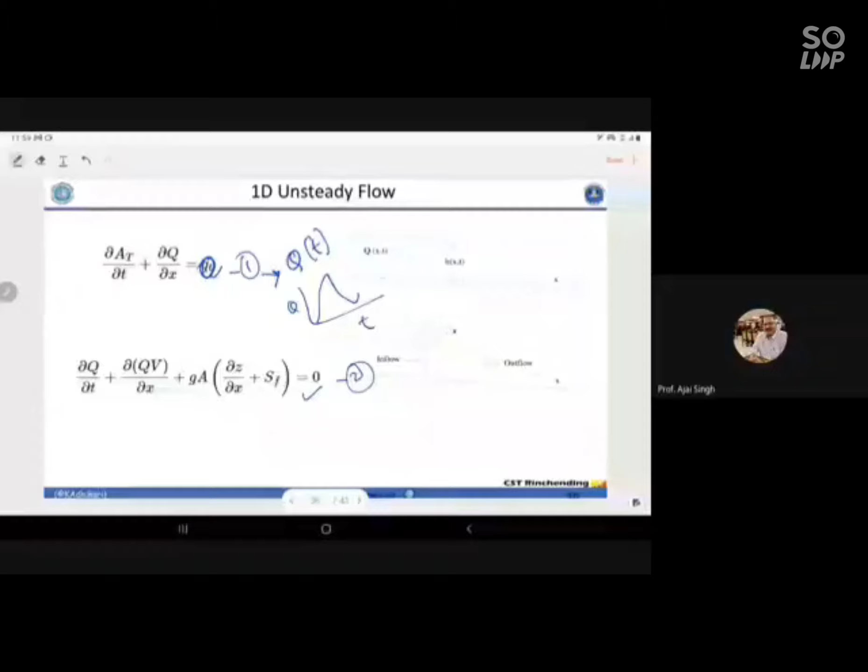If there is no lateral flow, meaning nothing coming in from the edges, then this term becomes zero. This is the continuity equation, and this is the momentum equation. These two equations are solved using the box scheme.

This is what I have already discussed, so I don't want to go over it again. This is what HEC-RAS uses.

To solve the shallow water equation, it uses an implicit scheme. That's why a boundary condition is required. For the implicit equation, a downstream boundary condition is required, an upstream boundary condition is required, and also the initial condition is required.

From my experience, HEC-RAS did not run if you don't put an initial condition. Initial condition means the situation before you impose the hydrograph. It could not run with an empty channel — you should have some water already running in the channel, only then it used to run. But the latest version, I heard from some YouTube videos, can now also run with an empty channel, without the initial condition.

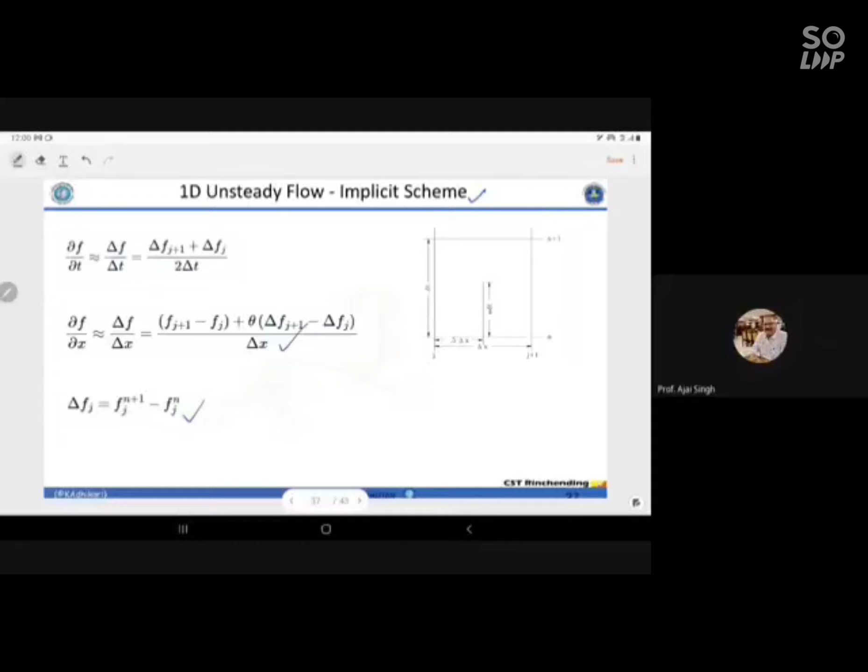By the way, setting up a two-dimensional analysis in HEC-RAS is very straightforward — you just need a digital elevation model, you make grids over the entire study area, put it into the grid, provide the boundary condition, and run. That's as simple as it is. In two-dimensional analysis, the hassle of making cross sections and so many other things is completely avoided, so running the model is very simple. But the principle, the mathematics, the hydraulics behind two-dimensional modeling is kind of challenging to understand.

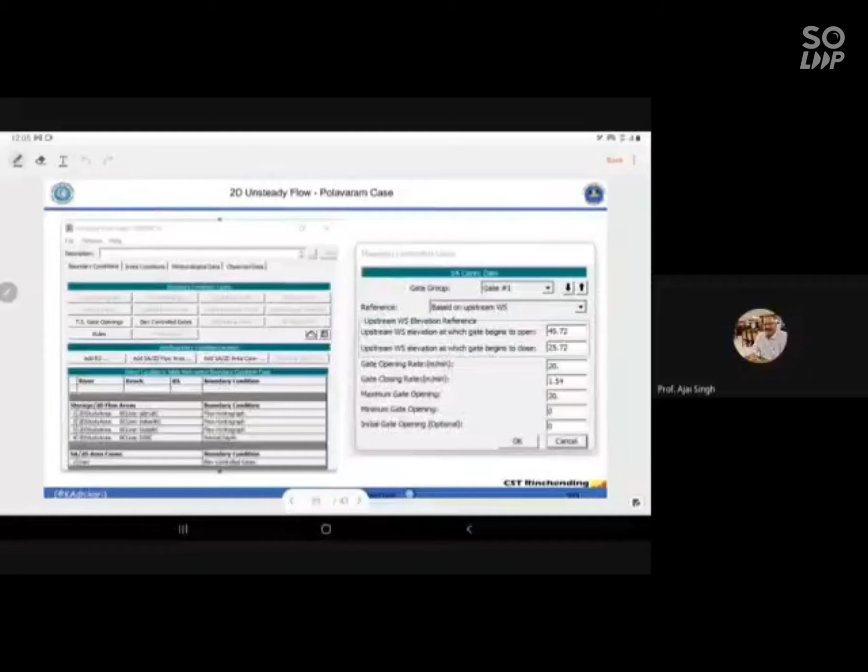The most important thing, as I said, is that everything else is straightforward. The geometry is taken entirely from the digital elevation model, so there's not much hassle—unlike 1D cases where you have to provide cross sections. The only things you need to provide are the dam information and the boundary conditions. Once that's correct, the model will simply run using the topographic data.

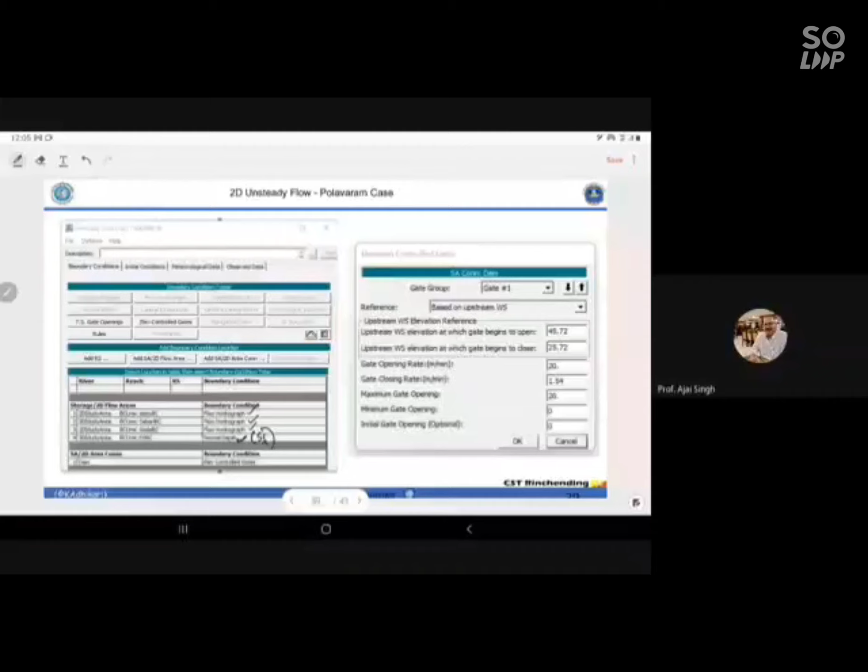So the boundary conditions are more important here. I've already discussed the hydrograph boundary condition, and the downstream boundary condition is given as normal depth. In fact, the model asks you to provide SF, but we give S0 instead because SF is not available.

The most important here is the downstream condition of the gate or the dam. We provided elevation-controlled gates as the boundary condition for the gate. Let me draw a simple diagram here—let's say this is our dam.

Our condition was that as the water reaches an elevation of 45.72 meters—the maximum water level in the reservoir—the gate should start to open. Since we were interested in seeing the backwater effect, our condition was that the dam is full, and when the dam is full, the PMF is coming. That is the most extreme case—there's nothing beyond this, your reservoir is full.

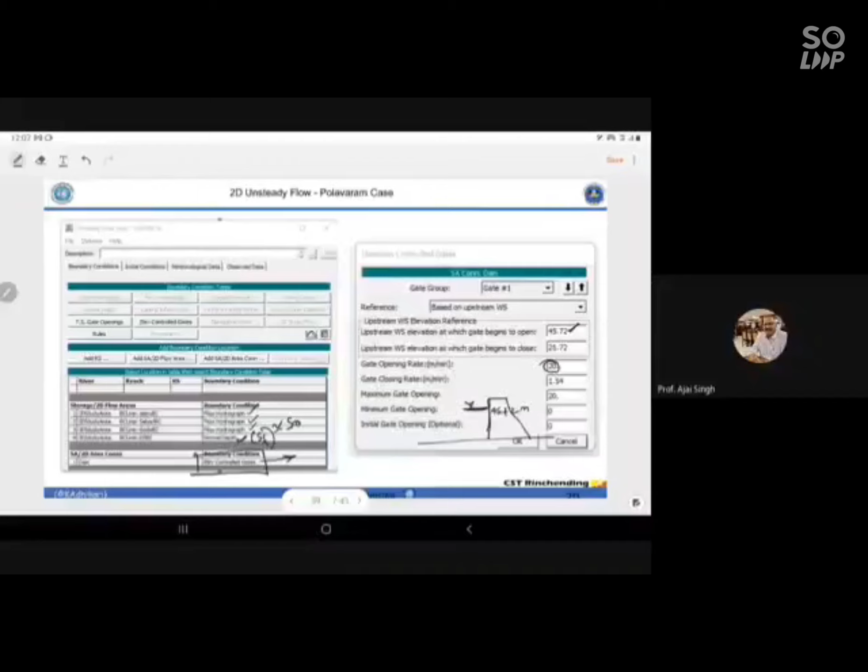On top of that, the peak PMF is coming—that was our case. So our condition was that as it reaches the 45.72 meter elevation, the gate should start to open, and the rate at which the gate opens was approximated, since exact values were not available. We assumed the entire gate opens within 1 minute.

And when the water level drops to 25.72, the gate would completely shut. So when the water level is at 25, the gate will shut, and when the water level is at 45, the gate will open—that was our condition.

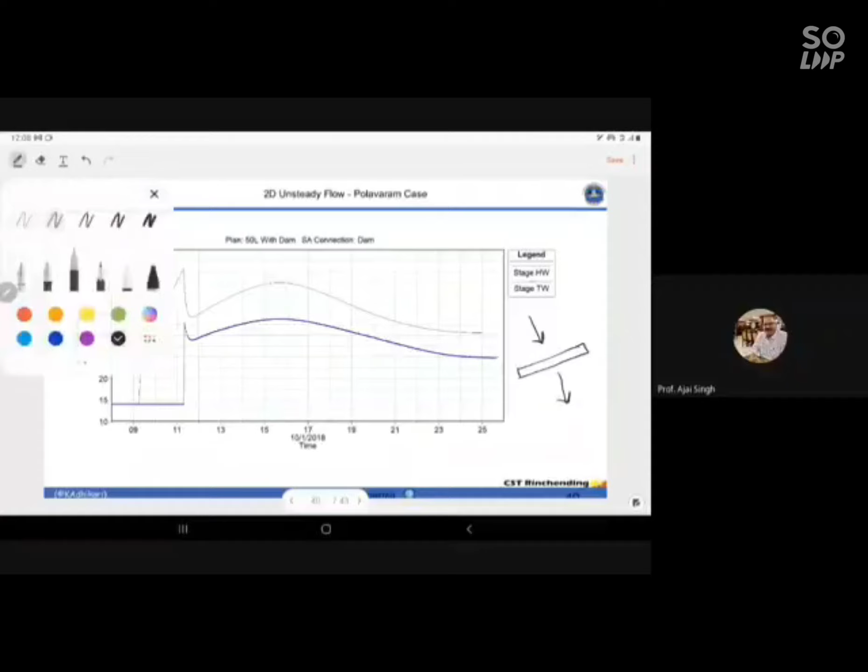Okay, and there's water going out. Let me trace this light blue with a different color, red I believe, so that it becomes much more visible to you guys. This is the headwater, meaning at the upstream of the dam, and the blue is at the downstream of the dam.

So these two plots are the stage hydrograph at upstream and downstream. Now my question is, why is there a bulge here? It has some interesting logic, so this is a simple question that I would like to throw to the audience, if somebody could answer this.

I will just run over the other slides, but in this meantime you can think about the answer. That's my discussion point. If you don't have any questions, we can discuss this: why is there a bulge on this? So that is my question, you can think it over.

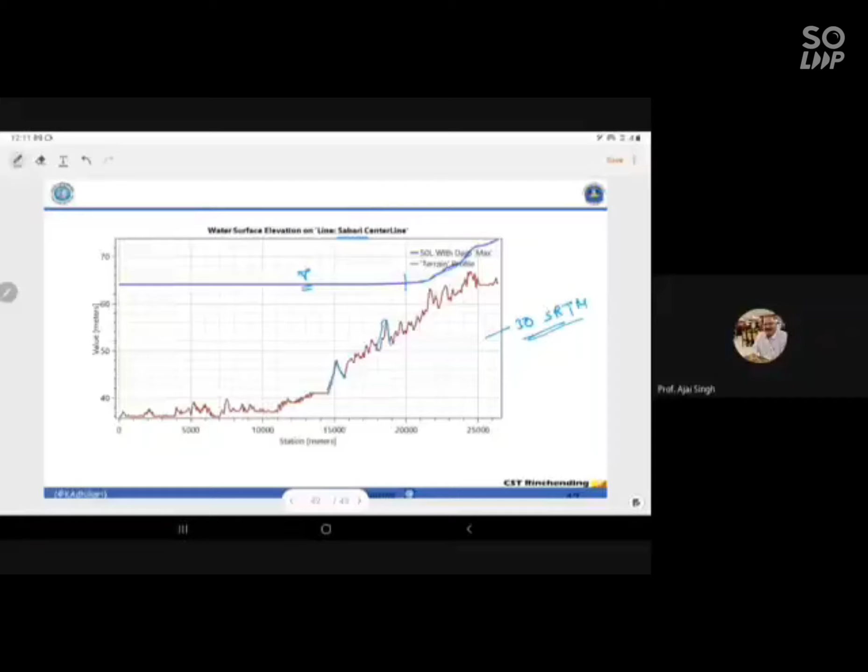And for beginners, you can get the most out of HEC-RAS if you subscribe. I'm not paid for this, I'm not paid for advertising it, but it has lots of useful information. This RAS Solution channel on YouTube has lots of useful videos, and most of the fundamentals I developed from watching these videos.

More importantly, there's a discussion with Gary Brunner. You can see episode 13 and episode 12, which are discussions with Gary Brunner. If you ask me who Gary Brunner is, he is the father of HEC-RAS, in a sense the person behind the HEC-RAS software. Right now I think he recently retired, but this is the guy.

It's about 1 hour 46 minutes long for one video, and another video is 1 hour 15 minutes long. They discuss the nitty-gritty of HEC-RAS in detail. So if you're really interested to learn more about HEC-RAS, please go through these videos.

Okay, so with this I would like to end my talk, and I believe I am at 12 minutes. Since it's Bhutan time, I think we have some time left, so let me go back to the same slide and start with the discussion. If you have any other questions, I'm happy to share—if I know the answer; if I don't know, then I'm sorry. So these are my questions to the audience.

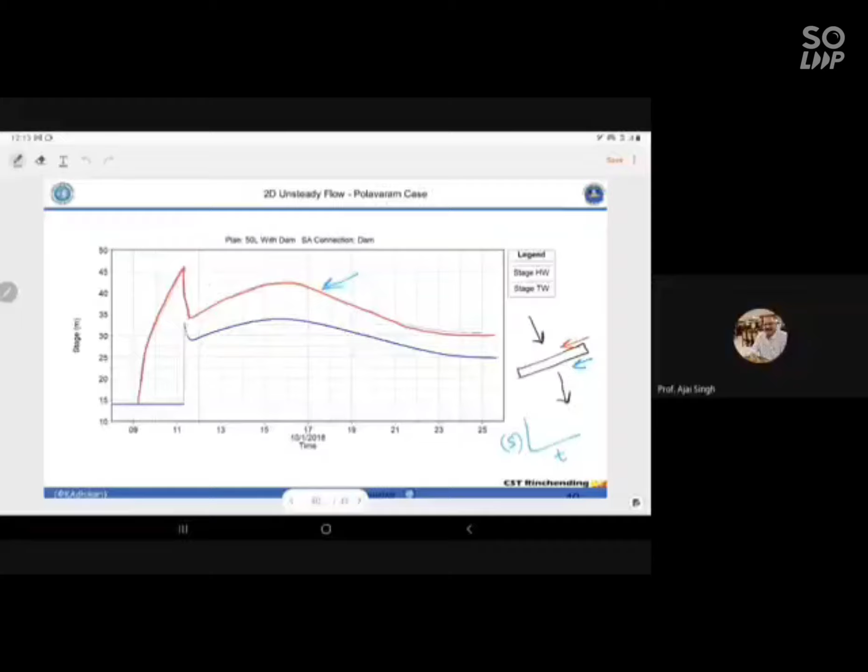Yes, if anybody has the answer, he or she can unmute yourself and respond to the question.

Sir, backwater curve. Okay, so the first answer I got is this is the backwater curve. Okay, fine. Interesting. Any other?

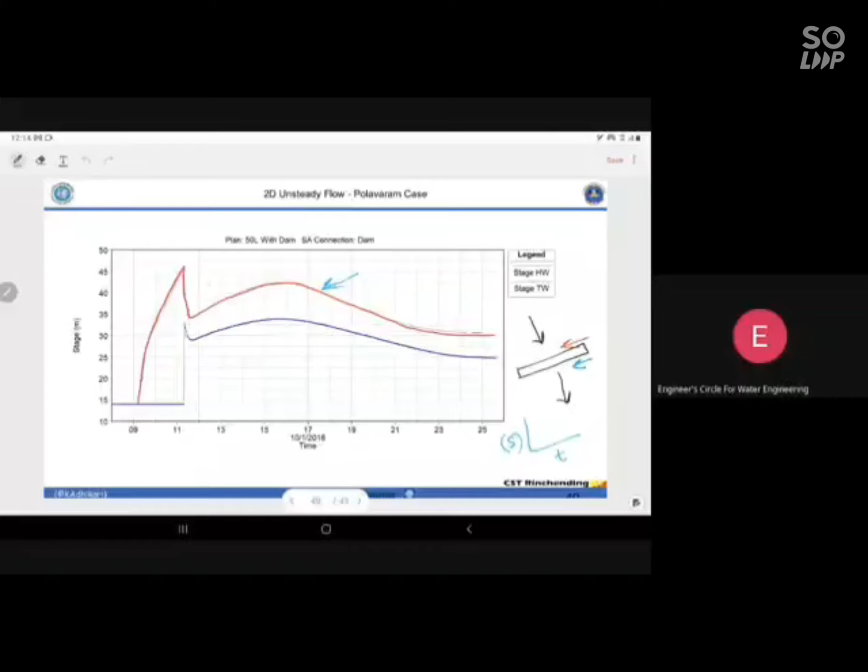I can write in the chat box also, if you don't want to speak out. Mr. Kirtan, yes sir, have a few questions in the chat box. Oh okay, let me check this. I'm not quite used to it, but this chat box is okay.

Hi, can DEM be enough for 2D urban modeling? So the first question is there from Sivasis Panda. Okay, Sivasis.

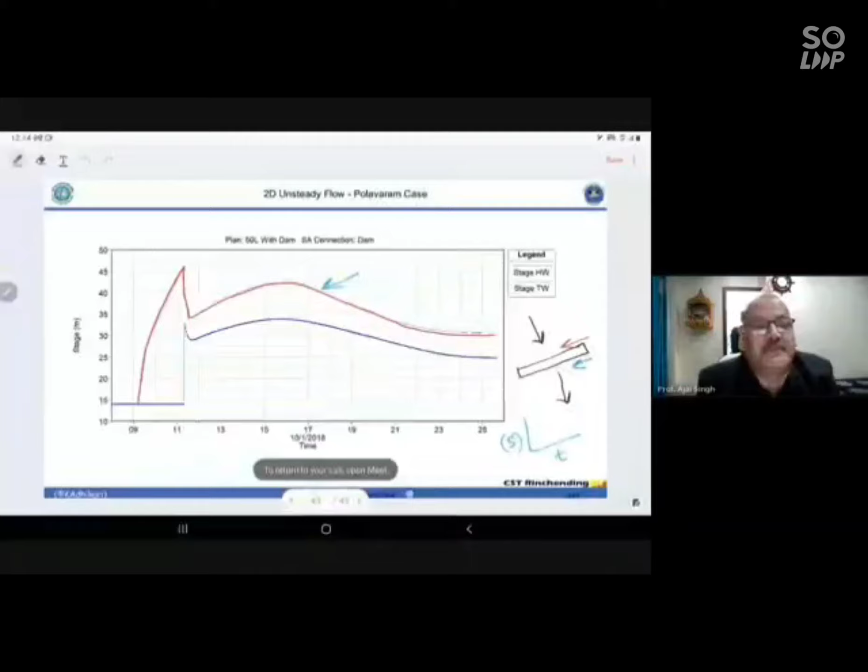Now let me go back to my screen here. So the first question is, maybe he is asking from this image, is DEM alone enough as the topography data for urban flooding? So what happens, we need to understand what is DEM and what is DTM. There are two concepts here: digital elevation model and digital terrain model. Let me explain this and maybe that will answer your question.

Digital elevation model means it will not take into consideration all the features that are man-made. For instance, the buildings and so many other stuff, these are not taken into consideration when they generate DEM. It is simply the topography.

So in digital elevation model, if there is a house here, if there is some kind of structure here, these structures are ignored. There is a forest here, this forest is also ignored, and only the ground surface is taken into consideration.

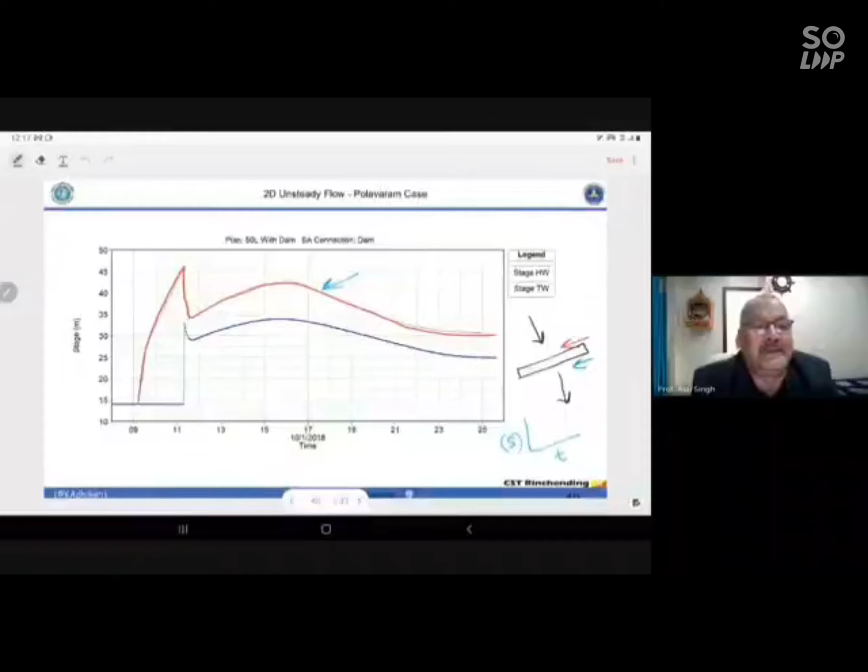Suman Dev Burban is asking, sir, please repeat the question you asked earlier. Okay, that is an interesting one. It was really fun having this kind of situation and analyzing in front of professors. It was fun.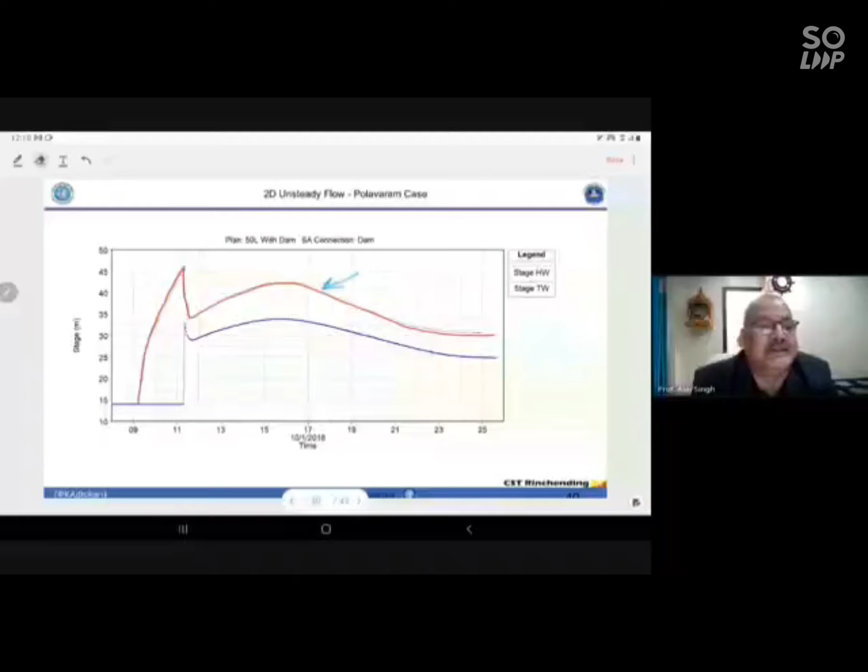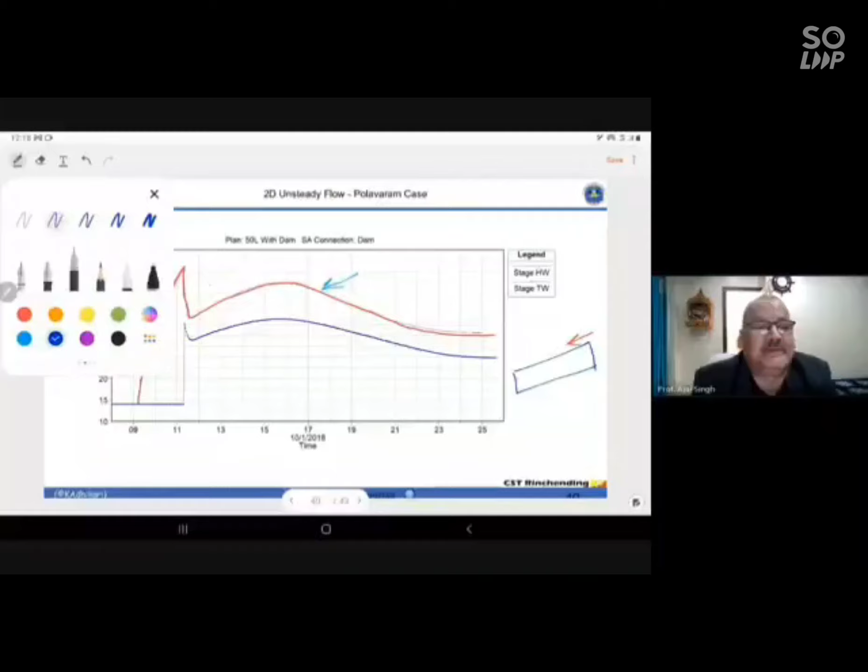So my question is about this stage hydrograph. There's a dam here, the Polavaram Dam. The red one is the stage at upstream, and the blue one is the stage at downstream. This graph shows the stage hydrograph. Stage means the elevation from the ground with respect to time, so this graph is the stage with respect to time.

Now my question is, why is there a bulge? What is happening, just in case I need to elaborate more, is that at this time the gate is opening. I said at 45.72 meters, I'm opening the complete gate.

So when I'm opening the gate, let's only take the upstream case. When I'm opening the gate, suddenly the stage is dropping. Of course, when you open the gate, discharge will increase, but the stage will drop because you are letting off the water. But again, you see there is a rise. Why is there a rise? That is my question.

I have got two answers. Amit Raj is saying that this is a positive surge, and Chitranjan Dalai is saying that this is a hydraulic jump. Okay, interesting, very interesting. I can see that my audience were not sleeping at least. Thank you, guys.

So just to cut things short, let me give you an answer. What is happening is we need to really think of so many other parameters here. It is not because of surges, it is not because of hydraulic jump, it is about something else. Now let me explain this, what is happening.

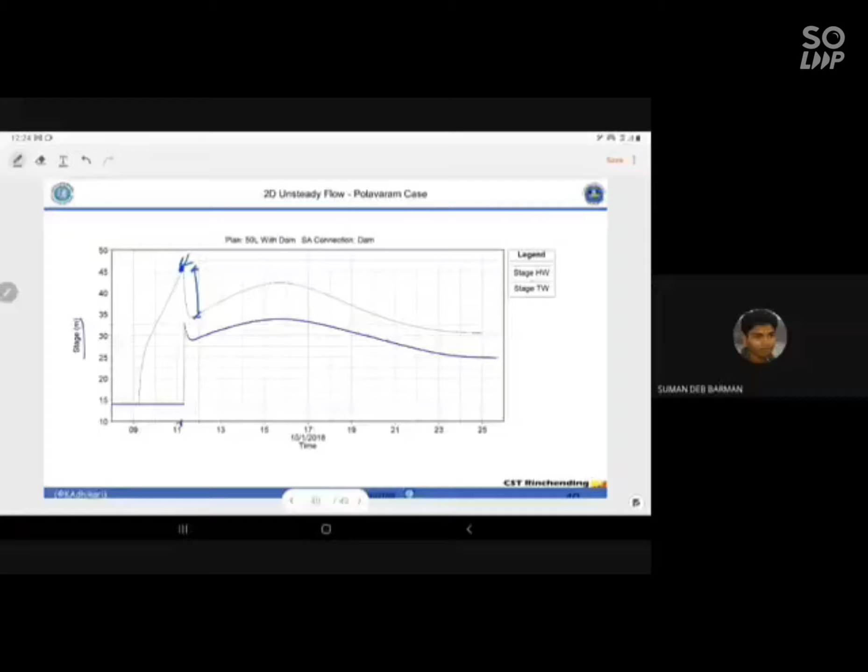So now once the dam has reached its critical level, we have to release the gate. I'm releasing the gate. As I open the gate, a lot of water is running out. That's why when the water is running out, nearly a 10-meter depression is observed upstream of the dam, because that much water level has decreased as I am opening the gate. But the peak has still not arrived, that is the main answer. Peak has still not arrived at the dam. So this bulging is because of the peak that is arriving at the dam.

One more interesting thing to observe is, if this peak has to be lower than the critical depth of 45.72 meters, this peak should not have exceeded this, or else it would imply that the dam was not designed properly, because the maximum PMF would have overtopped the dam. This was a good thing, there's a pretty good margin, about 2 to 3 meters, even when the PMF is coming, when the dam is full, which implies the dam was designed perfectly so that it can completely pass the PMF flood. It is a lot of water.

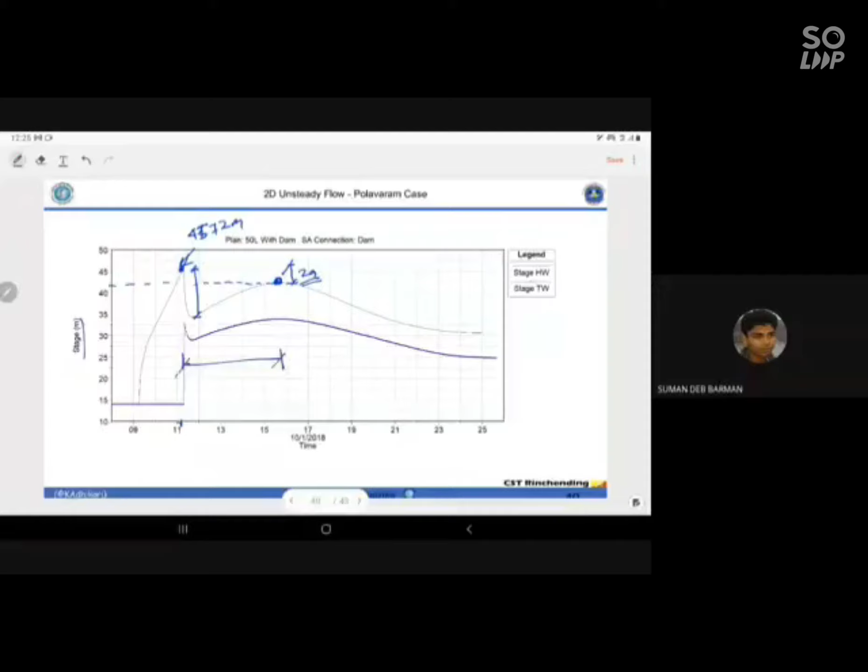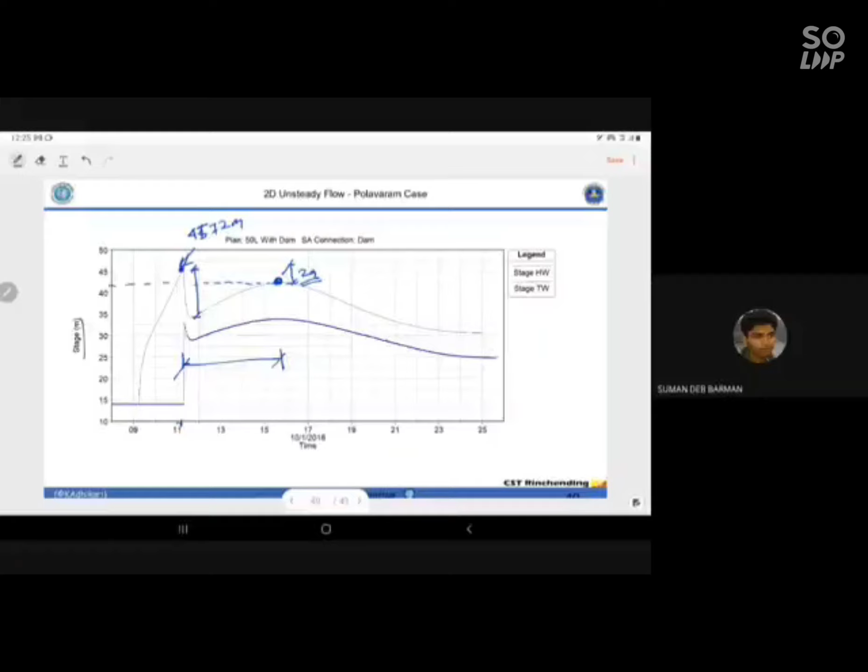The answer to my question, in a long talk cut short, is that the bulging happens because the peak is arriving after the dam is full. After I have opened the gates, only then is the peak arriving. And when the dam is completely open, when all the gates are open, it is able to safely pass through the peak discharge of the PMF. So that is the answer.

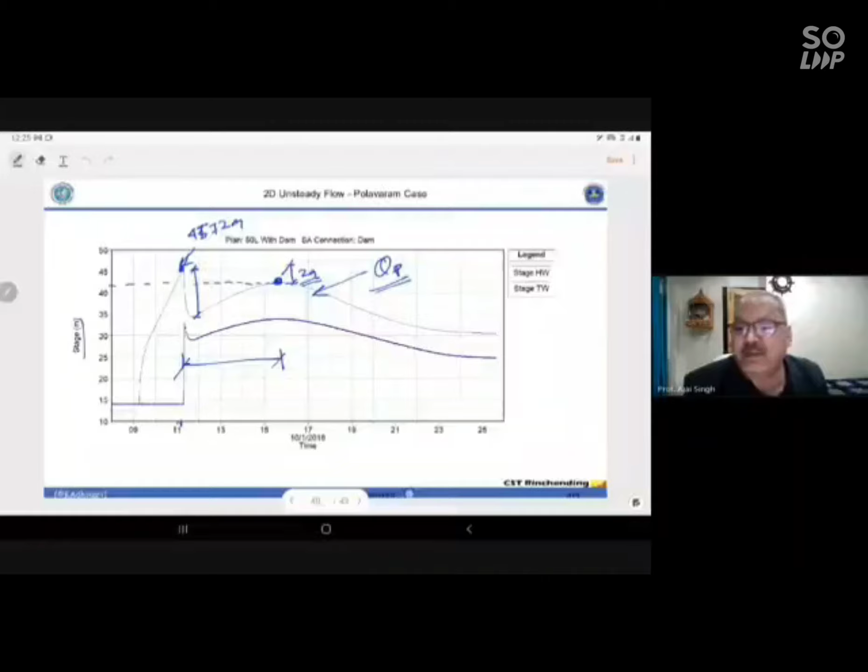Mr. Kirtan, we have a question from Sivasis Panda: how to avoid flood when there are river disputes in some parts or states in India? This is a general question, but maybe of interest. So I could not completely understand the question—how to avoid flood when there is a dispute between the states?

Okay, so how to avoid the flood? This is a policy matter, a kind of policy, but I don't have a perfect answer because it may not even have a perfect answer. So when I talk about how to handle the flood, let me change the question on my part, because I'm unable to answer your direct question. Let me answer how to handle the flooding instead.

So here comes the HEC-RAS modeling. If we have such a model in place, done prior to any development activities, then having the data in front of us, the policymakers and engineers can construct or go on with development according to the data we have. But if you ask me how to avoid the flood—flooding is primarily governed by rainfall. To avoid the flood you'd have to avoid the rainfall, which may not be possible. But as soon as the flood is coming, how to deal with it, that is a more interesting engineering problem, and for that, modeling would help. So that would be my answer—maybe not complete, but like that.

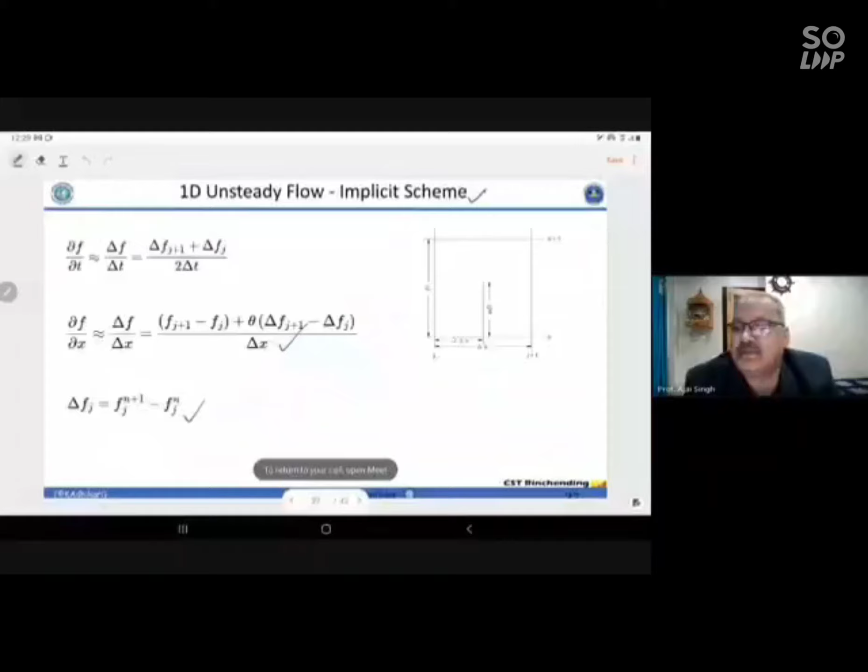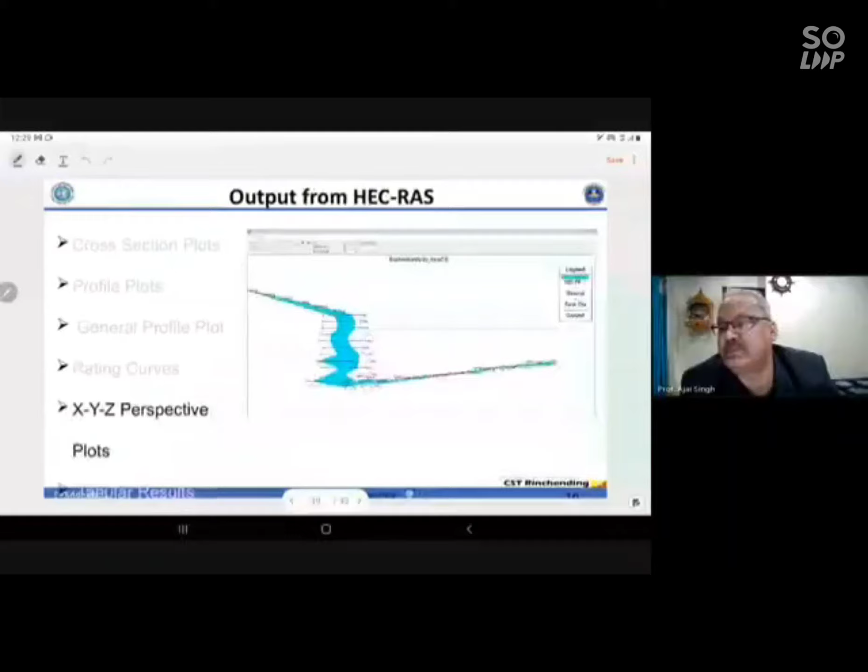So, friend, it's like this—when we talk about flood modeling, we do not take into consideration the lean season because we are not interested in it. We only take into consideration the peak discharge expected, like the PMF, the standard project flood, or other design project floods. These floods are taken as case studies and we only simulate for those cases. If there are many rivers, each will have some critical hydrograph, and that is where we want to estimate the discharge.

For one-dimensional modeling, you have to provide the cross-section details of all the rivers. For two-dimensional, like in the Polavaram case—Polavaram is a huge river, 100,000 cumecs of water, I can't even imagine. The complete water in one year from Bhutan may not even add up to 100,000 cumecs, that much I'm sure of. So this is a huge river.

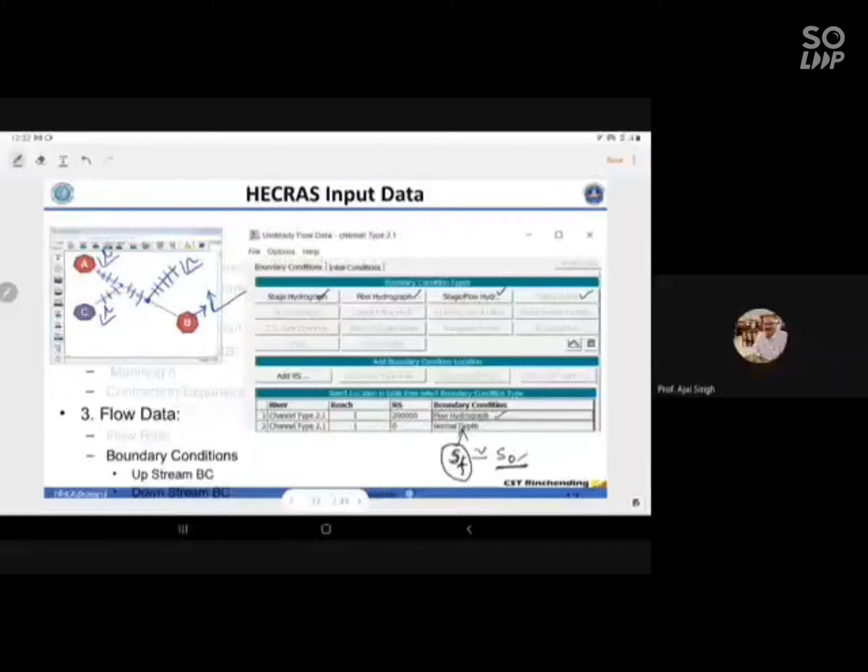Hello sir, in West Bengal, Mayurakshi River Basin, there is a stretch of about 4 kilometers where there has been sand mining for the last 2 years. So if I want to judge this effect of sand mining on the channel, sir, how can the HEC-RAS model help?

Suman, I believe it is Suman who is speaking right now? Yes, sir. Okay, Suman.

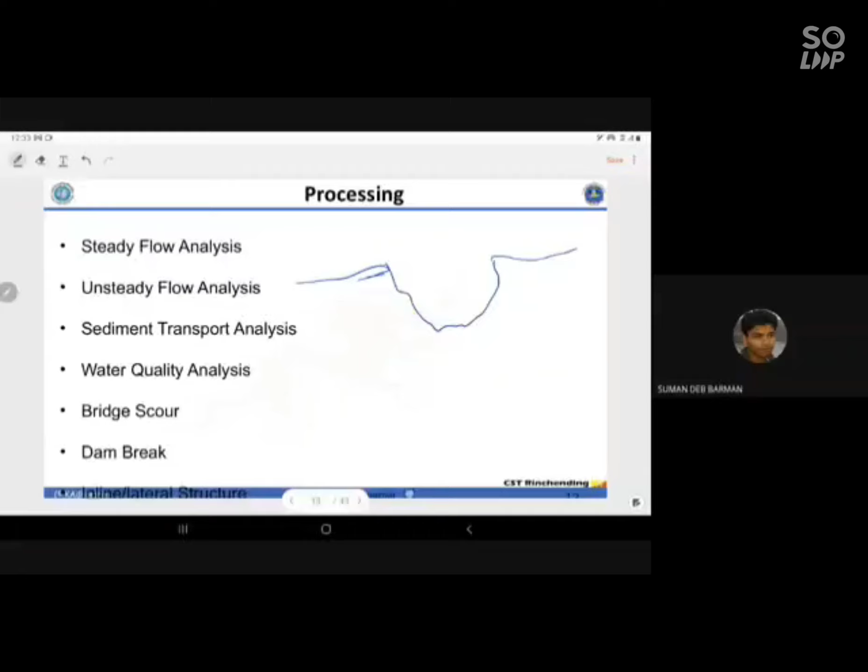HEC-RAS has one more capability which I did not discuss here: it can take into consideration the change in bathymetry. If this is the original bed, and because of sand mining the bed is going to change like this, HEC-RAS version 6.0 and beyond has the ability to do this kind of analysis. You can check it out in the manual.

The older version does not have this, but the latest version does. Sand mining basically means you are disturbing the bathymetry, that's it. So you can do this study in HEC-RAS.

Oh okay sir, and sir for that case, are just upstream and downstream boundaries required? Yes, for HEC-RAS, upstream is absolutely required because you need to put in some discharge. Downstream, you can simply put it as the channel slope, so that is not a big concern. Upstream, you need to put the discharge hydrograph.

So this discharge hydrograph, you need to have it. If you don't have the discharge hydrograph, you can approximate it by doing some rainfall runoff analysis of the catchment a little upstream of your study area, and from that you can get the discharge. If that is also not available, you can go to the site and observe the velocity of the river to approximate the discharge, and using that, you can do a 1D steady analysis. That is also possible.